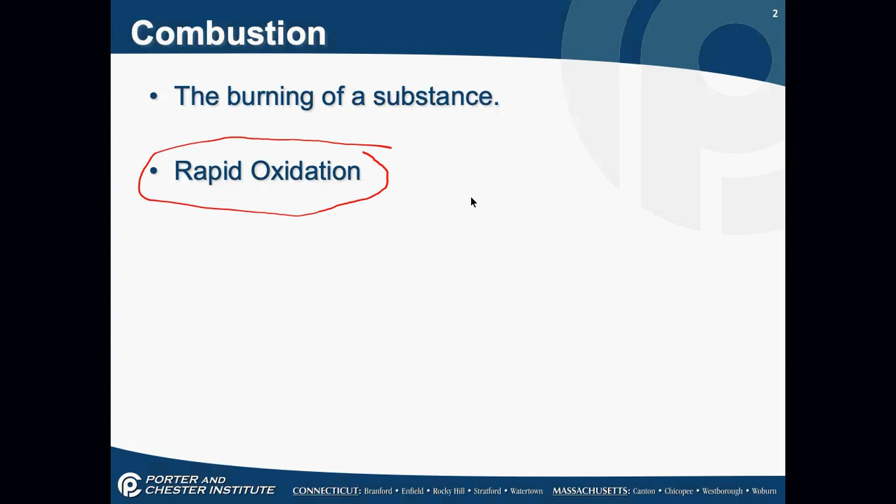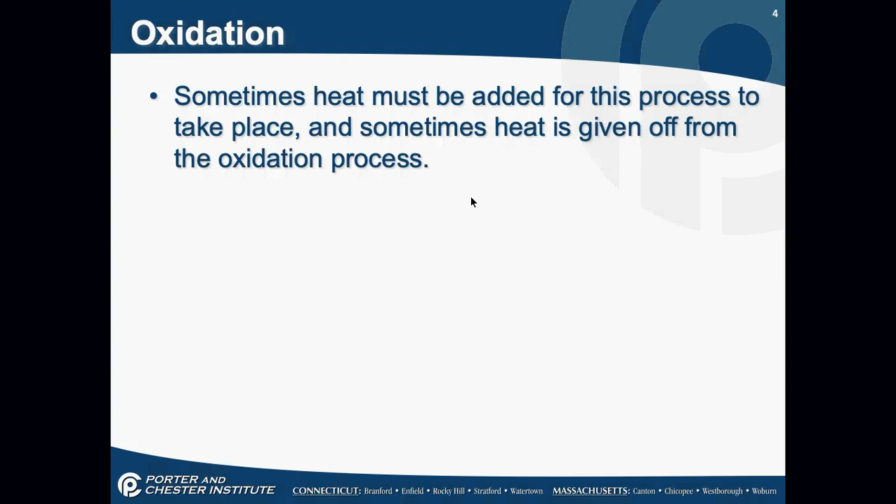What is it? It's combustion. It's the burning of a substance. We know that all matter is made up of elements. One of the most basic elements is oxygen. Many materials react with oxygen. This is why it's called oxidation. Rusting of metals is a common form. Sometimes heat has to be added for this process to take place, and sometimes heat is given off from this process.

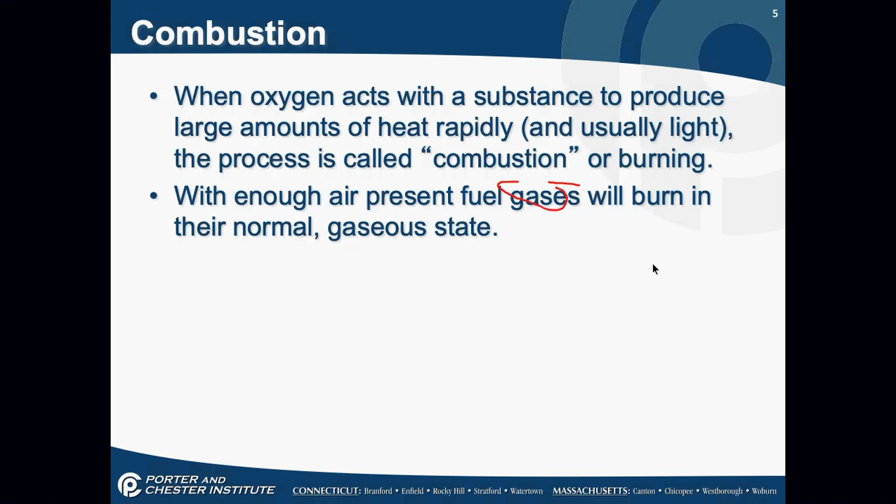When oxygen acts with a substance to produce a large amount of heat rapidly, and light as well, it's called combustion or burning. When enough air is present, fuel gases will burn in their normal gaseous state. Again, gases. We cannot burn a liquid or a solid. Solid or liquid fuels have to be changed to a gas first before they burn. I've got to add heat to make this transition. Anytime I'm making a transition from a solid to a liquid, from a liquid to a gas, I have to add heat. Remember, latent heat happens anytime there's a change of state.

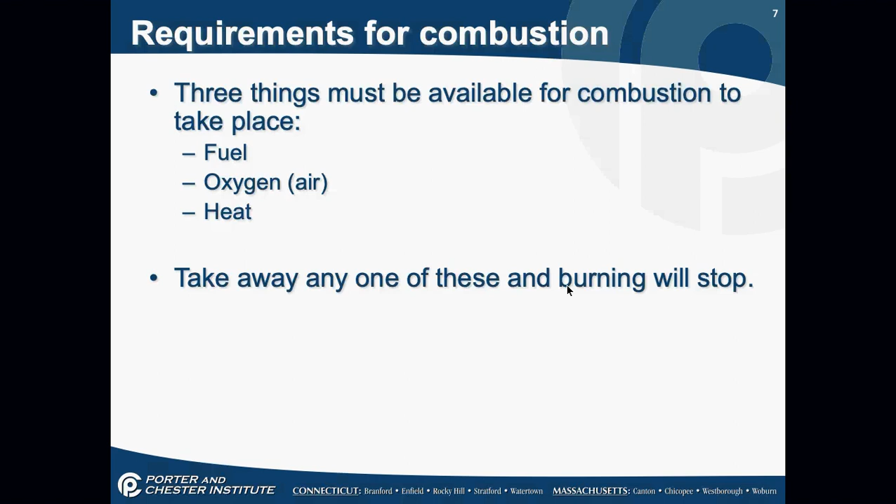Three things have to be available for this to take place: fuel, oxygen, which is part of air, and heat. You take away any one of these three items and the burning process will stop. This is called the triangle of combustion. This is really critical, folks, for you guys to know. You should be able to draw this out if you're ever asked to. We have fuel, air, and heat. You remove any one of these, the combustion process stops.

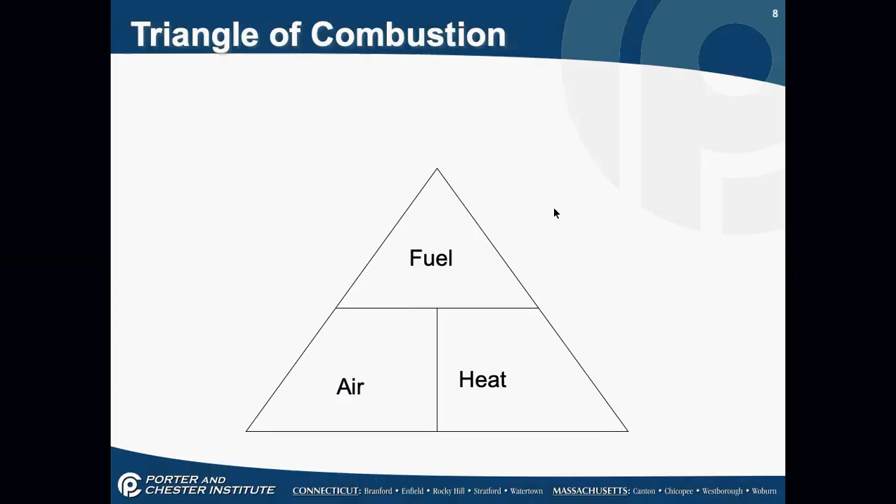Fuel oil is 85% carbon and 15% hydrogen. Air is 21% oxygen and 79% nitrogen with some other little stuff thrown in that really doesn't matter. You're in control of the combustion process because you can regulate both the fuel and the air. Whenever we're working on oil burners, those are the only two things we can regulate, the fuel and the air. That's what we're in control of.

So we take a wood-burning fire for an example. I throw a blanket over the fire and cut off the air. The fire goes out. I drag all the wood away from the fire. The fire goes out. I throw water on the fire. We chill the wood temperature down. The fire goes out. Every one of these examples has something to do with the triangle of combustion.

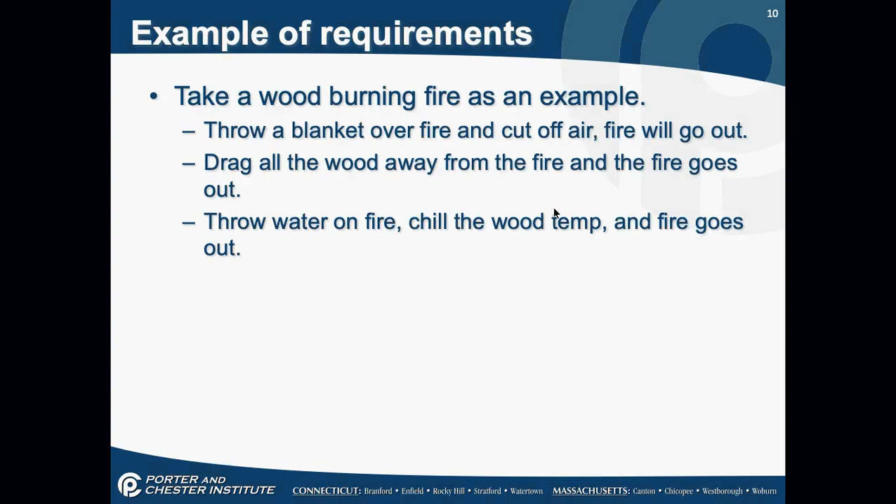Combustion gives off stuff. We call those the byproducts of combustion. Combustion gives off water vapor. It gives off carbon monoxide. It gives off carbon dioxide. And it gives off carbon. All of these are byproducts of combustion. Which is the most dangerous byproduct of combustion? Carbon monoxide. Yeah, carbon monoxide is the most dangerous byproduct of combustion.

Can carbon dioxide be dangerous as well? Yes. It's not as dangerous, but if carbon dioxide totally replaces the oxygen content in a room, it's dangerous. If you ever feel like you're falling asleep in a classroom with a bunch of people in it after like 3 hours of lecture, it might not be the lecture that's putting you to sleep. It might be the fact that everyone is exhaling carbon dioxide, and if there's not enough fresh air coming in, that room suddenly has a lot of carbon dioxide in it.

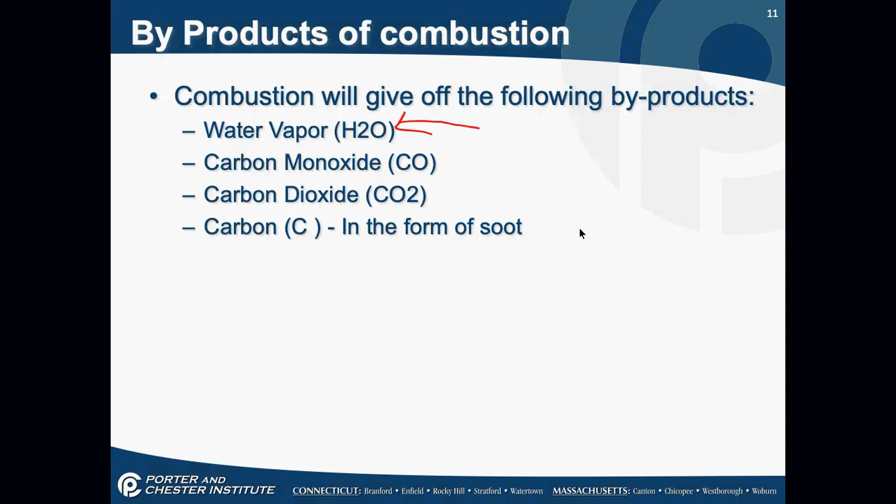So again, all of these are byproducts of combustion. You hold your hand over a candle flame, not too close so you don't get burned, and you're going to feel some moisture. Carbon monoxide, I really don't want it coming off a flame, but it's there. Carbon dioxide, it's part of burning. And then you have carbon, which is soot.

The air-fuel mixture must be exact. If the mixture is correct, then proper combustion is achieved. If the mixture is incorrect, you have poor combustion.

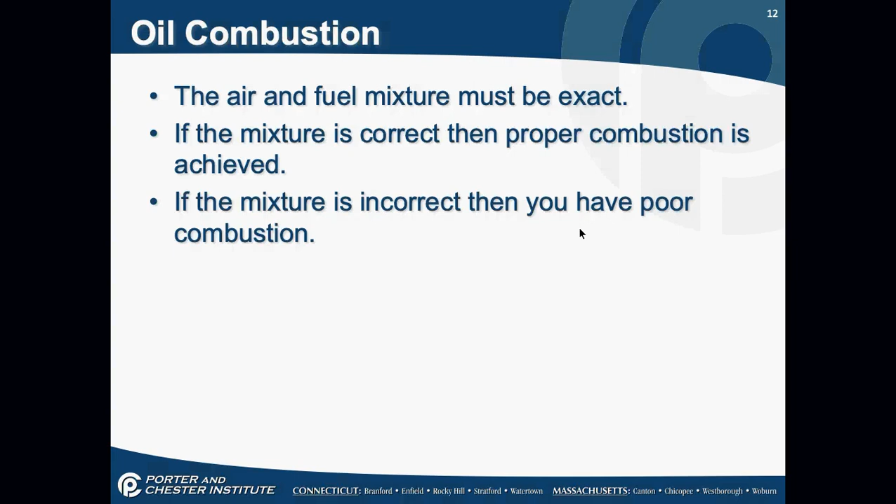As long as we have proper combustion, we get more heat per dollar. In other words, we're burning all the fuel. We have clean exhaust, we have a clean furnace or boiler, and we have proper efficiency. The fuel and air ratio, the mixture between fuel and air, is your most critical mixture. That's your only adjustments. But it can tell the difference between a lot of money being burned, a lot of carbon monoxide, soot, and everything else, or a proper and clean burner.

Less heat per dollar. You're not getting the 140,000 BTUs per gallon. You're getting more soot and smoke, which translates to more furnace or boiler maintenance. Unburned fuel equals poor efficiency and a waste of money.

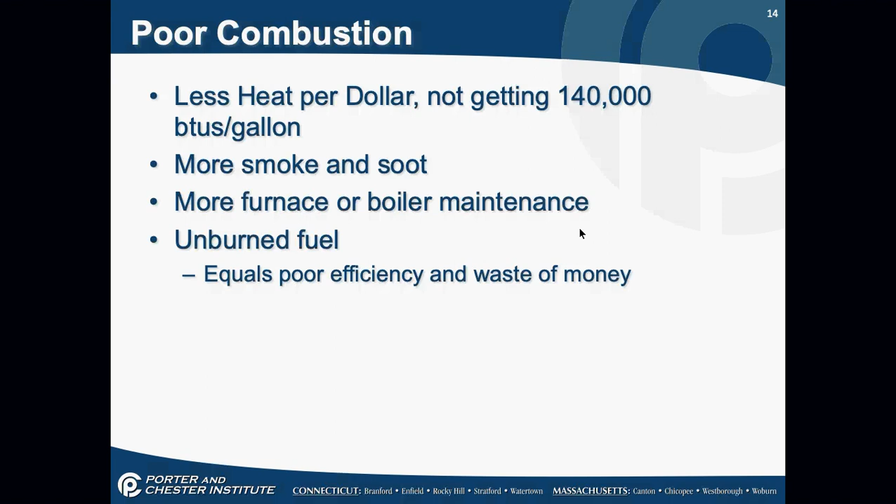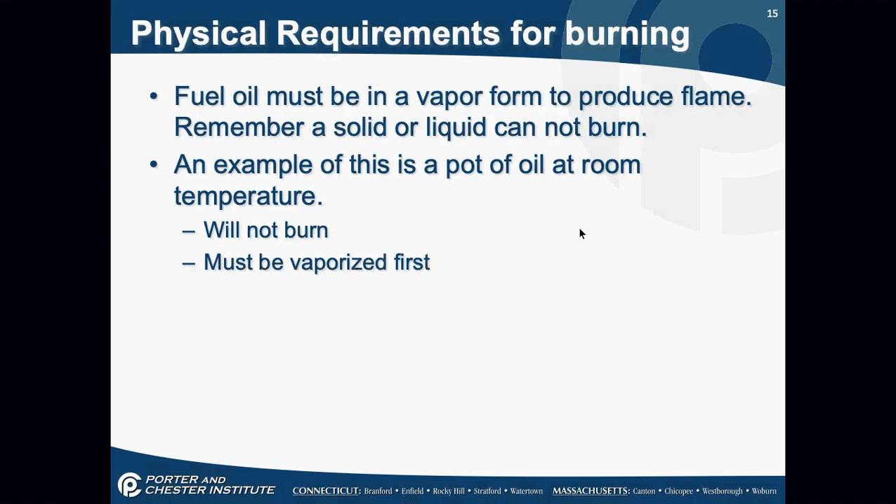Fuel oil must be in a vapor form. We've talked about this a lot. An example of this could be a pot of oil at room temperature. If you quickly dip that match into the oil, and not just light the surface where the vapors are, the oil's not going to burn. It has to be vaporized first. The oil burner has the primary function of vaporizing this fuel.

We have 4 different types of oil burners available. Some of them you'll never see. You have the pressurized atomizing or gun type. This is the one we've been talking about. You have a rotary cup, you have a vaporizing, and you have a pot burner. You're never going to see the last one.

The pot type burner basically looked like a fry pan. The oil came in with a sort of a float valve. It had a puddle of oil and it burnt the oil on the top. Basically, the fire just sat on the top and burnt off the vapors. The heat from the fire creates more vapor. These things used to be installed under the floors in front entry homes of houses.

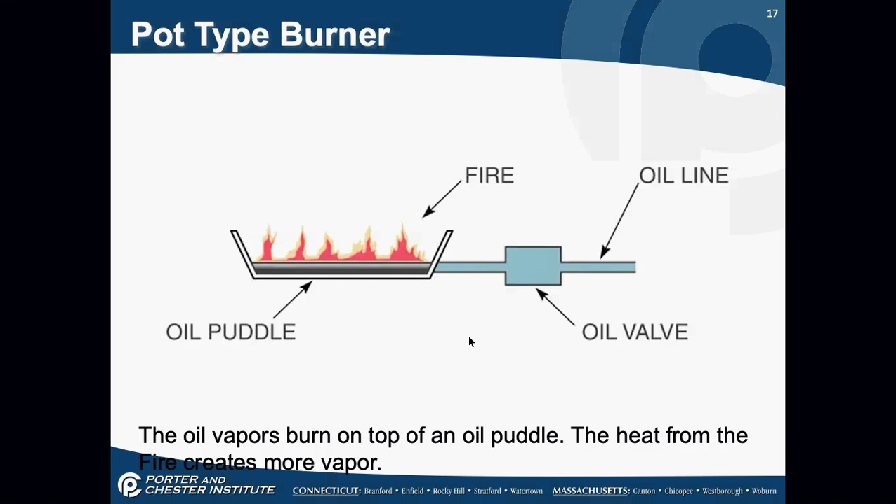Now look at this. Where's the exhaust? Anybody, where's the exhaust? There is none. Cannot tell. There is none. Think people might have died a little bit here? The carbon monoxide went into the houses. You had to have open windows and good ventilation or you had issues.

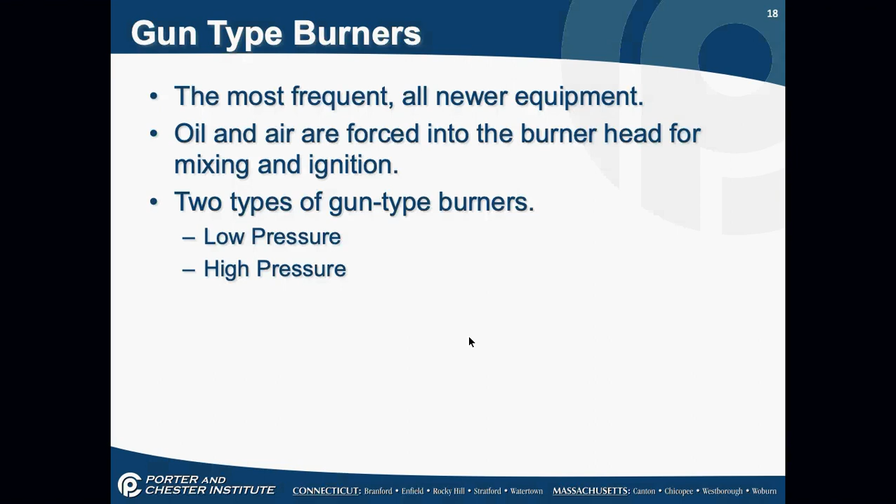Gun-type burners, they're the most frequent. They're on all newer equipment. Oil and air are forced into the burner head for mixing and ignition. There are 2 types of gun-type burners, low pressure and high pressure. These are all your parts. Hint, by now, you should be able to identify all these parts. So in other words, if I gave you a blank diagram and gave you 15 minutes to name all the parts, you should be able to do it. All of these parts we've talked about.

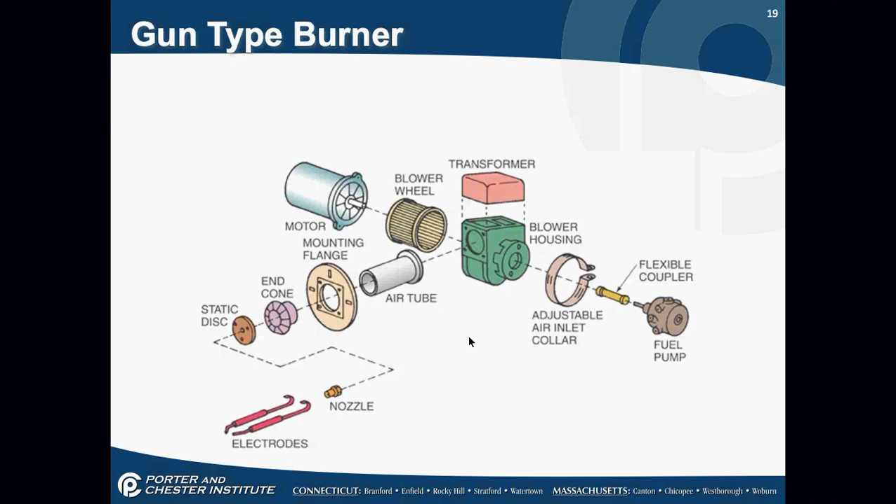A low pressure type only runs at about 10 psi of oil pressure. We mix the air and the oil together before it goes through the nozzle. That's a low pressure type burner. You don't see these. They're more in process stuff, more in like making something out of something. Air and oil is mixed together right in the burner tube before it comes out of the nozzle. Secondary air comes in around it. This type of burner is not found very often anymore.

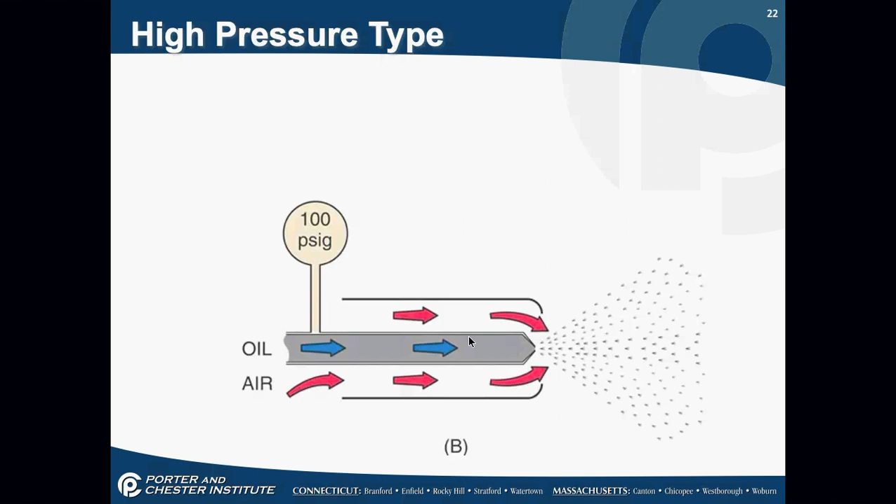The type of burners we are dealing with are the high pressure burners. The oil is forced through by itself and then mixes with the air as it comes out of the nozzle. 100 psi and higher. High pressure gun type burners. Oil pressure is much higher. It is the type of most modern burners. It's a high pressure gun type burner.

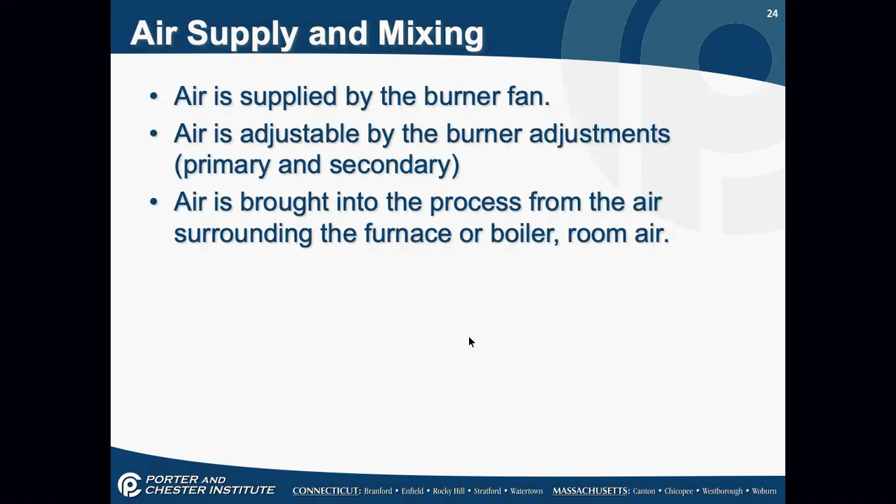Air is supplied by a burner fan. We've talked about this. Air is adjustable by the burner adjustments. Air is brought into the process from the air surrounding the furnace or the boiler room. It's room air. It's conditioned air. Fuel and air are mixed together by some of these parts: turbulators, end cones, spinners, flame retention heads. All are designed to mix the droplets of oil and air.

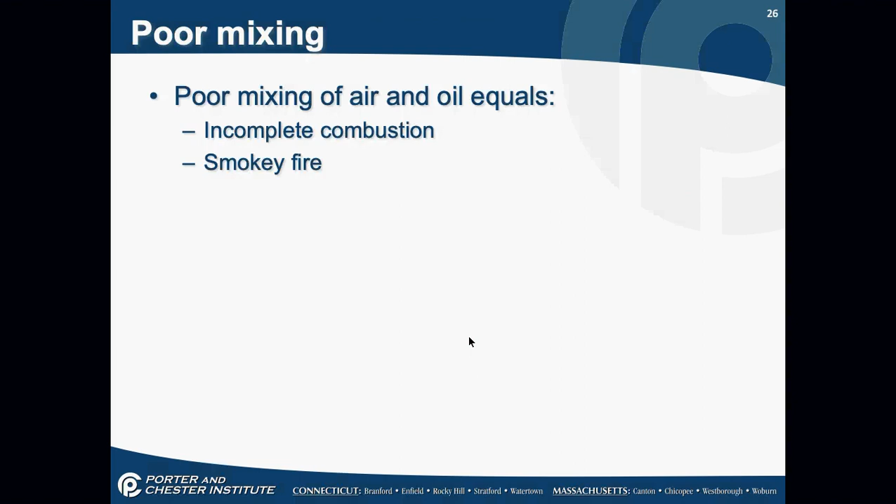Now think back to yesterday. What did I tell you about this mixing process? What about the spinning of the droplets in the air? There's something very important. They rotate in different directions. Yeah, rotate in different directions. Very important. Poor mixing of air and oil means incomplete combustion, which is smoke. You got a very smoky fire if it's not mixing properly.

We have several factors that control this air and fuel mixture. We have to have the spray pattern correct. We talked about this yesterday with our nozzles. We talked about the spray angle being correct. We talked about airflow that has to match both the angle and the pattern. And we talked about the importance of all nozzles matching the manufacturer specifications. All of this has to do with controlling the air-fuel mixture of the oil.

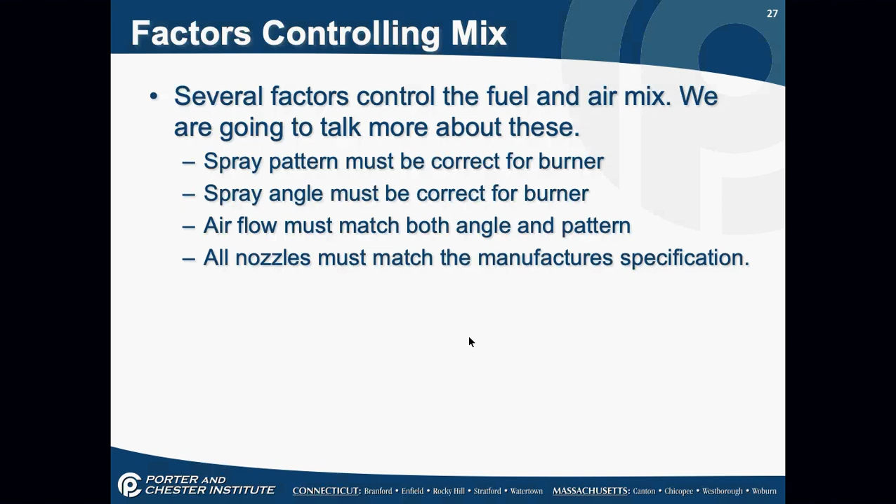It is extremely important that the oil does not hit the outside of the combustion chamber. It's extremely important that the air-fuel mixture is absolutely correct. The burner design and parts are very important to this process. Flame retention heads, if there's air that internally recirculates, if there's an end cone on the end of this, the air swirl pattern, all of this is extremely important to this air-fuel mixture.

Again, there's only two things you can control in an oil burner, and that is the amount of air and the amount of oil. Burner design varies by manufacturer. Any questions on that?

No, sir. Anybody else?

Okay. Now, I talked a little bit yesterday about, I asked a question, can I increase the efficiency of oil boilers as they get older? No, sir. Okay. Now, that's not to say that a burner cannot be kept efficient. So as we go through this part, I really want you to keep in mind that burners don't get better with age. I also want you to keep in mind that you are not mechanical engineers, but there are some very simple things that you can do to keep the efficiency. Okay, but efficiency becomes a big place.

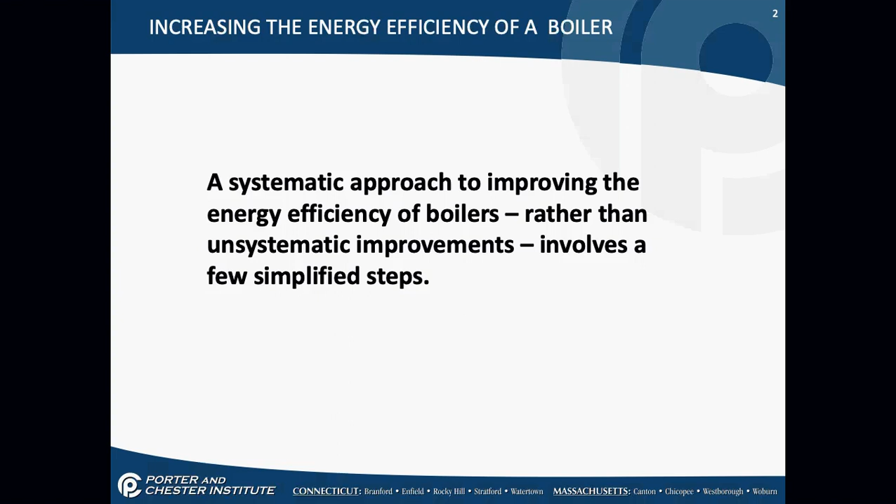Now, this is talking about boilers more than furnaces, but it still involves burners, which is why I even go over this. Okay? We have to keep things clean. Everything has to be clean. If we have a soot layer, and that's why this is starting to talk about importance, and this is why we talk about annual maintenance. A soot layer, that's a very fine soot layer. I mean, 0.03 inches is not all that great. It can decrease efficiency by 9.5%. If I have a 0.18 layer of soot, it can affect efficiency by 69%.

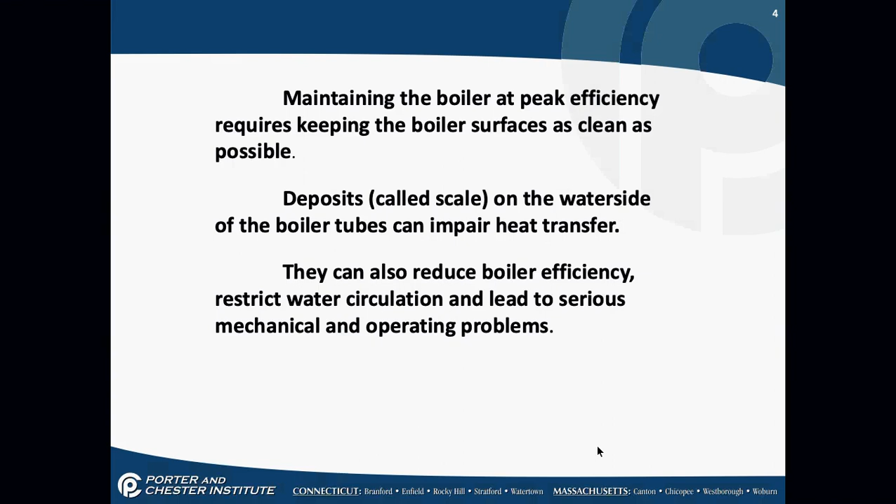Think about that. So a dirty furnace, a dirty boiler, reduces efficiency, and the reason is because the boiler or furnace is not absorbing that heat, it's sending it up the chimney. The flue gas temperature goes up, as does energy cost. So my biggest efficiency thing in both boilers and furnaces, this says boilers, but it's both, keep them clean. Maintaining the system at peak efficiency means keeping it as clean as possible. Deposits on the water side, that's the inside of the boiler, which we'll talk much more about in the future, can also impair heat transfer. But the biggest issue we have is with the soot building up, and that's on the outside of the boiler tubes. 1 millimeter of scale buildup in a boiler that's on the water side can increase fuel consumption by 2%.

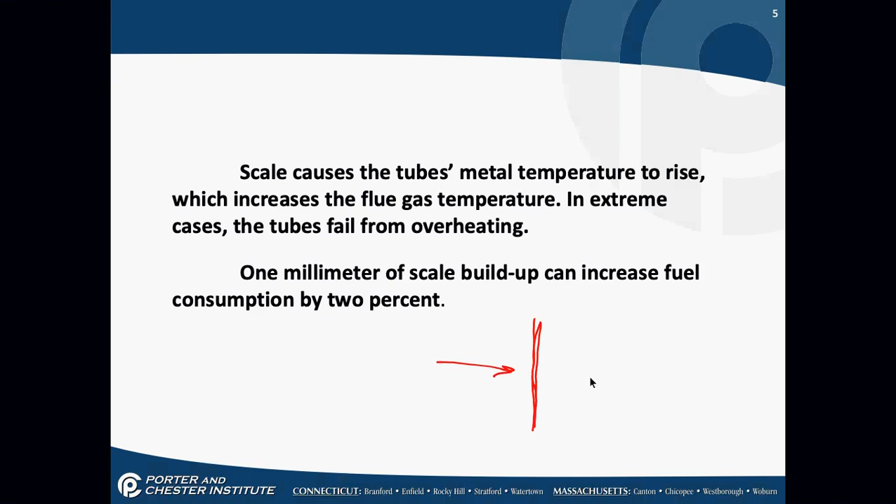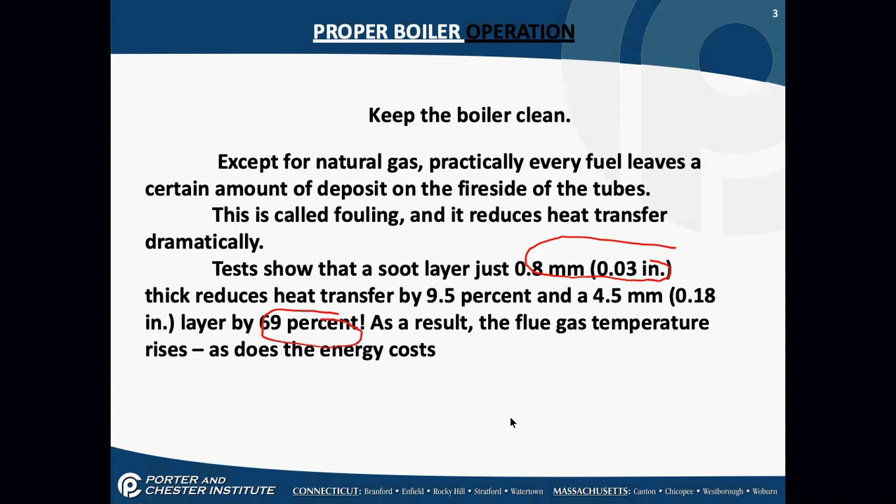So we basically have a heat exchanger. Think of this wall as a heat exchanger. My fire is on this side of the wall. My water or air in a furnace is on this side of the wall. Anything that builds up on this wall can increase fuel consumption. Soot, from my last slide, soot can affect efficiency in small quantities, 0.03 inch layers of soot, 9.5%. That's a lot of money. Double that to 0.18 inch of soot, 69% fuel cost lost up the chimney. Okay, so cleanliness makes a big difference.

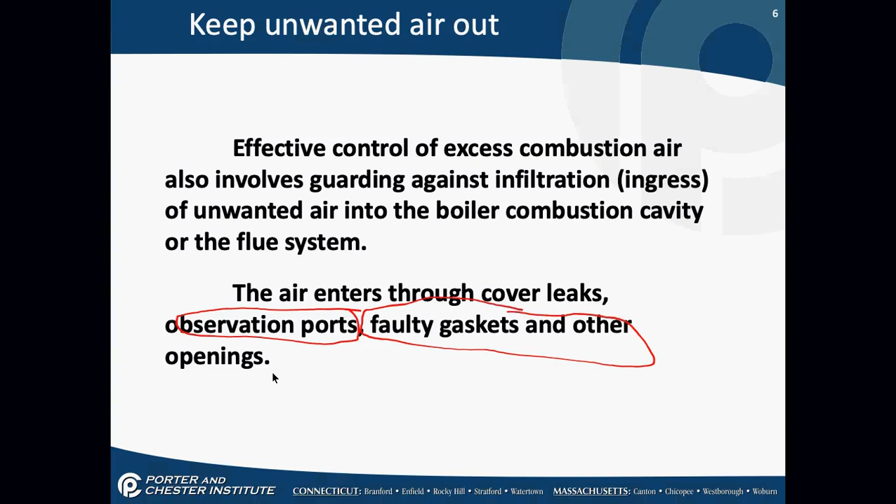Okay, excess combustion air, I'm going to talk about this. We want to remove unwanted air. We mix air in to our combustion process in exact amounts. So if we have other air leaking in through missing ports, missing covers on observation ports, faulty gaskets, doors not closed properly, things not put together properly, you're going to have excess combustion air. It's going to affect your combustion, and it's going to allow the combustion gases to go up the chimney too fast before all the heat is absorbed. So again, anytime we send combustion gases up the chimney before absorbing all the heat, we lose efficiency.

We measure excess air, and I'm going to talk about that when we talk about our combustion efficiency. Excess air is one of our measurements. It is one of the major ways our oil burning equipment drops in efficiencies. Too much air increases the flue gas temperature and drops the efficiency dramatically. Okay, too much air. Now, too little air, what does that cause? What if I have too little air in a system? I mentioned this yesterday. What does that cause? Should decrease, shouldn't it?

If I have too little air, it's going to increase the efficiency drastically, but it's going to cause another problem. What is it? What does incomplete combustion cause? Carbon monoxide. That's one. What else? Carbon dioxide. I'm more looking for a nasty substance that if it gets too bad, it's the apprentice job. Soot. That's the one. Incomplete combustion causes soot. If I have too little air, I'm going to have a very smoky fire, and I pity the next fool who's there on the piece of equipment.

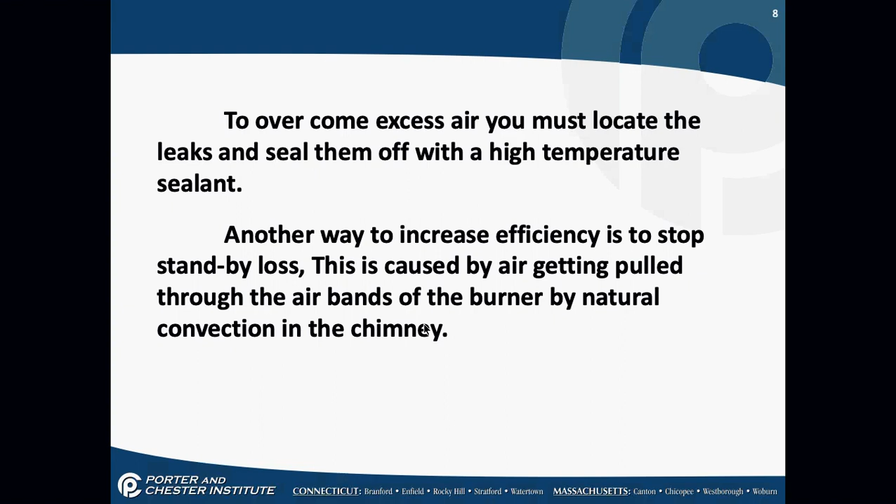The way we do this is we use a specific high temperature sealant. It's a goop that's high temperature rated, and we seal the air leaks. You should not be able to see the oil flame through any opening other than a small observation port covered with tempered glass when that furnace is running.

The use and sizing of a boiler system. We talk about load sizing. We give an entire design course on this for a very specific reason. Back in the dark ages, when these furnaces and oil boilers were first being installed, someone stood at the curb and said, oh yeah, this system needs to be 150,000 BTU output. And every house on the street would end up with the same boiler size because the contractor bought them in bulk and put them in.

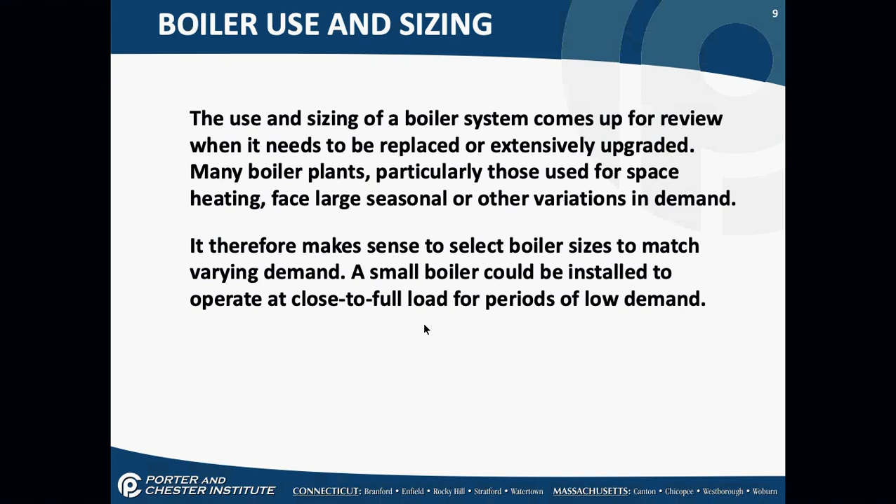So one of the things you do is make sure that the sizing of the equipment matches the building. We do a design term. I don't have you guys do all the worksheets in design term just to have you do worksheets, there's a reason for it. A good technician understands the design and the heat loss of a building.

In evaluating boiler sizes, consider current and future heating requirements. This is probably one of the biggest issues that I have seen in dealing with new customers - the sizing of equipment based on current and future heating requirements.

I don't think anybody in here on this call is, other than Mr. Smokers, from the Massachusetts direction - most of you guys are in Connecticut. Take a cold winter day, let's say January 1st, and everybody's home, sleeping off their New Year's Eve. Everybody starts getting up and using showers, someone starts cooking, using the dishwasher, running water. If you have a boiler that's also the hot water heater, what happens to the load on that piece of equipment?

Would it increase because everybody's using it at the same time? Yeah, it's going to go way up. Okay, now a year later...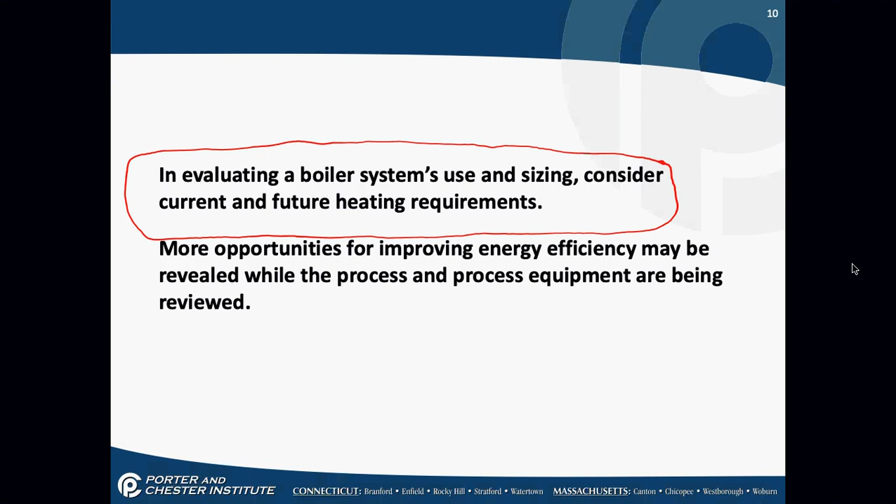All you're going to see is that the boiler is running properly. You can always ask the customer, hey, what has changed? Don't say everything's running right, I need to know what else has changed. Just ask, has anything changed in the house? The homeowner will tell you, they're proud of this stuff. What has changed in the last year? Again, you have to look at the appliances. All of this is about current and future requirements.

The best way to get the most out of oil-fired equipment is to have it serviced on an annual basis. Service consists of cleaning the flue passes with a brush or vacuum, changing the nozzle, changing the filter, changing the pump strainer. Sometimes flush out the oil line -- I don't 100% agree on that one, but they have it on there for some reason. But change the nozzle, change the filter, change the pump strainer.

So when I ask a question that says, how often do you change the oil filter, what's the correct answer? Annually, during service. That's the oil filter. A lot of you guys, I did put some comments on that assignment you turned in, okay? A lot of people were thinking air filter, which could be between 1 and 3 months. You're not going to change an oil filter between 1 and 3 months. So again, just take a look at my comments on the assignment.

Okay, that's how we keep efficiency up. Now, what is the most important thing people can do on an annual basis when they have oil? What's the whole premise of an oil system? Making sure you have enough oil in your tank. Well, making sure it's serviced annually.

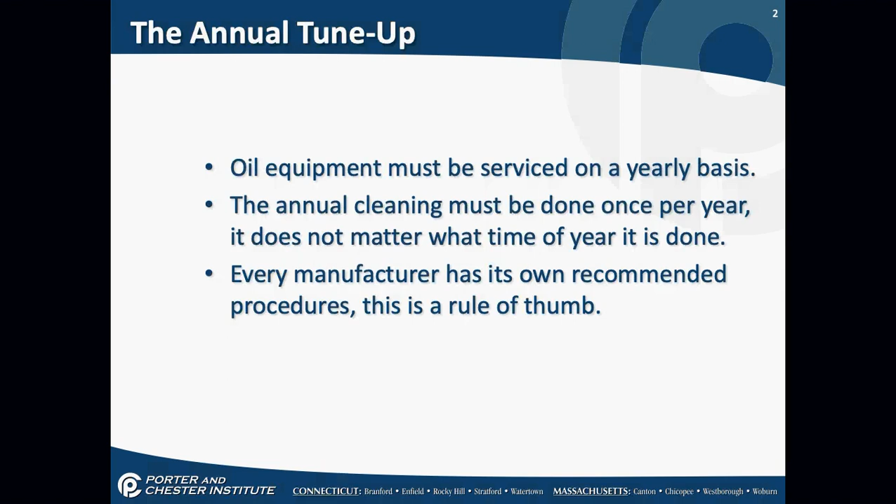Every manufacturer has its own recommended procedures. What I'm going to give you here is called a rule of thumb. For lack of manufacturer directions, this is what is involved in an annual tune-up.

We start off with the customer contact, or interview, we call it. In other words, hey, I'm here to do your annual cleaning, how's it going, anything I need to know about? Have you noticed any strange smells? Have you smelled oil, or anything else unusual coming from the basement when the system's running? Because that's what your customer will know -- any strange noises. All of this tells you if there's anything you need to look specially for. The next step of the annual cleaning is to check the system.

Why do I check this system before I start anything? Anybody? Make sure the system is functioning properly.

Well, yeah. How many times, I can't count the number of times where I was sent out to do an annual cleaning and you show up on the job site and the system is not running, and they're trying to get a service call out of the annual tune-up price. If you do not check this system before you start your annual maintenance, and if it isn't running when you're done, in other words, if there's a bad part or something, you have no choice but to replace that part courtesy of your company, because you will never be able to prove that you didn't break the system.

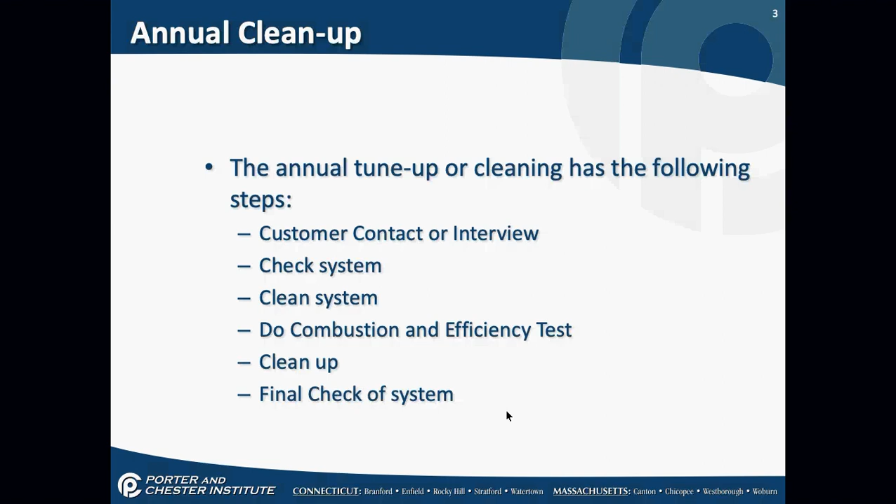Nice. That's why I spend the time on this. It's important. It may not seem important because, hey, it's not system related, it's not how to fix the box. But it's stuff I want you to keep in mind.

Depending on the company you're working for, you should be looking for opportunities such as add-ons, indoor air quality equipment, energy-saving add-ons, and the biggest one ever, maintenance plans. All of this you cannot sell to a customer if you don't have credibility. Most companies will give you some sort of spiff or bonus on this, as long as it's done honestly. I know a technician who added about $100,000 a year to their income because of energy efficiency add-ons and stuff like that. So I feel very strongly about that.

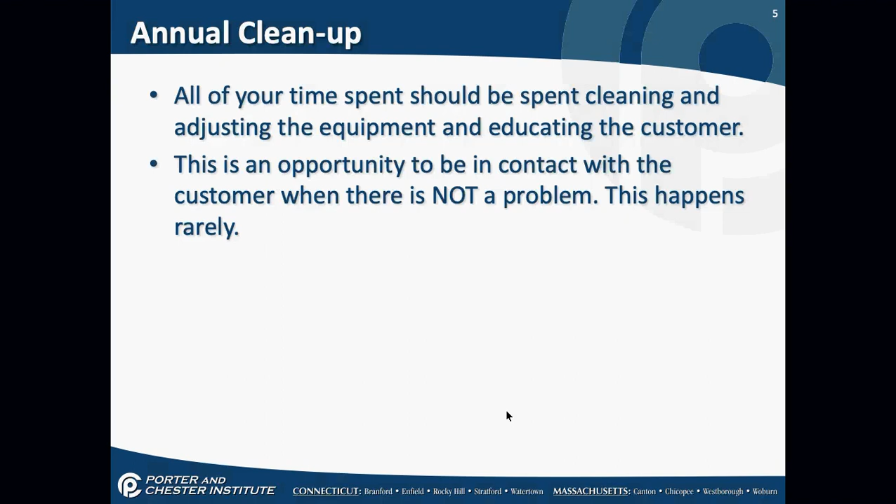Do it right, involve the customer, and you will make money. All of your time spent should be spent cleaning and adjusting the equipment and educating the customer. There is an opportunity to be in contact with the customer when there's not a problem. Preventative maintenances, annual tune-ups, are the only time you are going to be in contact with the customer when there's not a problem. In other words, you have a customer who's thankful you are there in front of them because you're taking care of their equipment and they're not going to have a no-heat situation. That happens very infrequently.

Upon arrival at the job site, spend a few minutes with the customer. Ask about unusual sounds, cold spots, fuel usage, strange smells, any concerns or anything they want you to check.

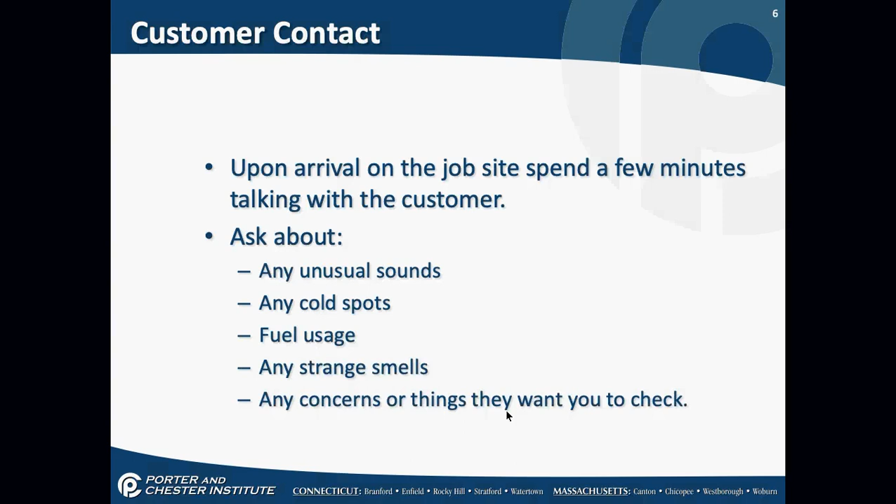Ask the customer to show you all the thermostats in the house. Don't assume there's just one. Check each thermostat. If it's a mercury thermostat, check it with a level. Since I'm there for not a service call, I'm going to recommend that the customer replace any mercury thermostat with a digital or snap-acting thermostat. I'll make the recommendation right there as I'm walking through the house. Hey, you know, this thermostat has mercury in it. We're just recommending to everybody that we replace these. If you want, before I'm done today, I'll give you a quote.

Turn all thermostats up over room temperature by 10 to 15 degrees. In other words, the system's going to keep running while I'm in the basement.

Ask the homeowner or customer to take you to the furnace or boiler. Explain to them what you're going to do and how long it will take. Ask the customer the best route to get in and out to your truck, since you're going to be carrying oil and supplies. Try to use an outside door or basement hatch. You don't want to walk across the customer's white carpet.

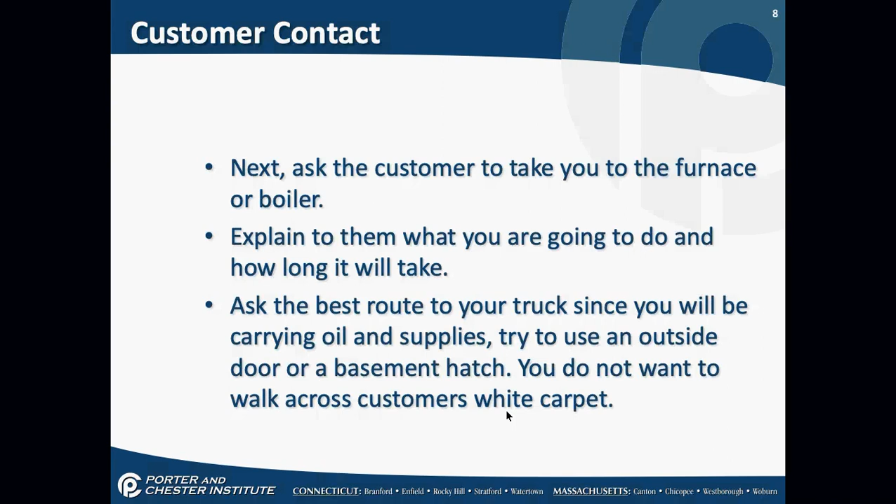If your dispatcher was a good dispatcher, they actually told the homeowner you're going to want an outside entrance before you showed up on the job site, so you won't have to break out the trusty snow shovel and shovel yourself a path. That is, if the dispatcher was a good dispatcher.

Offer to show the customer what you're doing. Most will say no, they'll see you when you're done, but offering the customer to stick around and see what's going on builds credibility. You're not hiding anything, there's no mystery. Again, don't be the guy who grunts at the customer and walks to the basement and sees them an hour and a half later.

The furnace or boiler should be running at this point due to turning up the thermostats above room temperature. Check to see if there's any signs of problems like smoke, oil leaks, or water leaks. You still have the customer with you. If that furnace or boiler is not running at this point, we have a problem situation. Again, check for oil leaks. You just want to do a quick walkthrough while that customer's with you.

You can ask the customer, hey, has this water been here for a while? Or when did this start? Hey, I smell a little and see a little oil leak here. When did this start? You're acknowledging to the customer that there's a couple problems you have spotted off the top, so there's no question ever if you caused the problem or not.

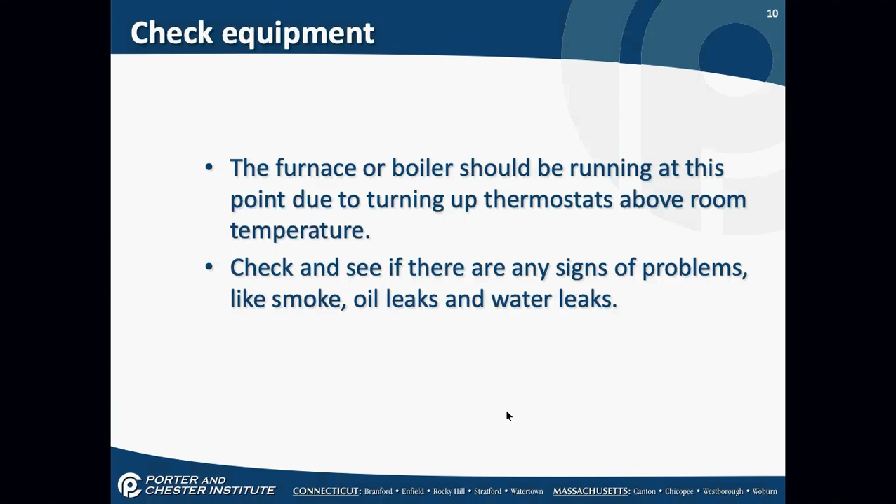Check anything that the customer may have complained about during your initial conversation. You want to note any of these problems on your service ticket. And anything that's not repairable as part of your preventative system service, you want to give the customer a price to repair. You can't replace and repair everything as part of your preventative maintenance call. Your employer is going to get pissed with you if you do that.

Some of this stuff is a service call. If I have an oil leak around a filter that I'm going to change anyways, hey, yeah, I could probably fix that oil leak when I change the filter. That's part of your service call, and you're building credibility. But if I have an oil leak in the middle of an oil line at a connection, I'll have to write a service ticket for this one because it goes outside the scope of the preventative maintenance. All of this stuff is income to your boss.

While the burner is still running, you're going to close the firematic valve next to the oil pump. You're not going to close the one at the tank. The burner is going to start to lose oil pressure and then lose flame due to lack of oil. The primary control should trip out at the time that's written or stamped on the control.

What have I just checked the operation of? Right here, what have I checked the operation of? Folks, what have I checked the operation of right here? Your stack switch? Yeah, either my CAD cell or my stack switch. I've verified that my safety works. So I've done step one of my preventative maintenance. I know that the safety works, and I also know that that valve works.

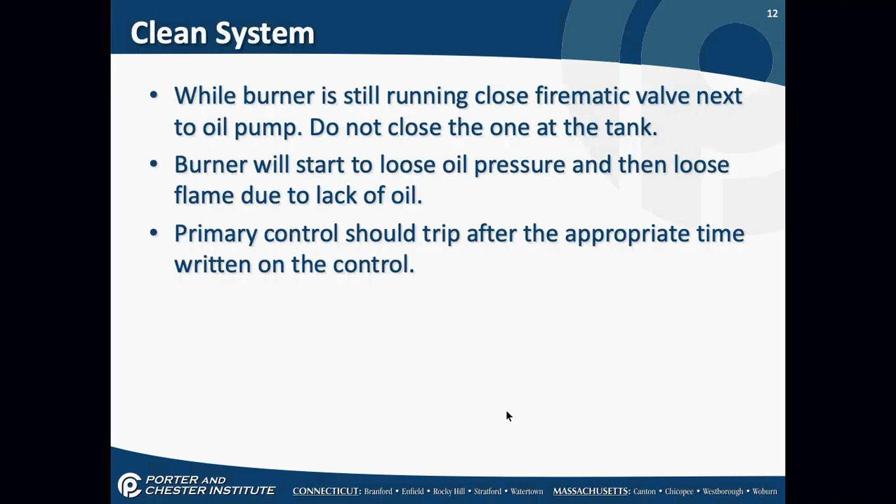Okay, what else have I accomplished? Do I have any more oil in that pump? No, I don't have a ton of oil in that burner anymore at this point. Okay, now I'm going to turn the service switch off.

Okay, if it's a forced air system, I'm turning everything off. If it's a boiler, I want to leave the water circulating in the system. In other words, I don't want to turn the main power off. I'm just going to turn the power to the burner off. Usually there's a plug you can pull. Okay, all I want to do is disable the burner. I want to leave the water circulating because I want it to cool down.

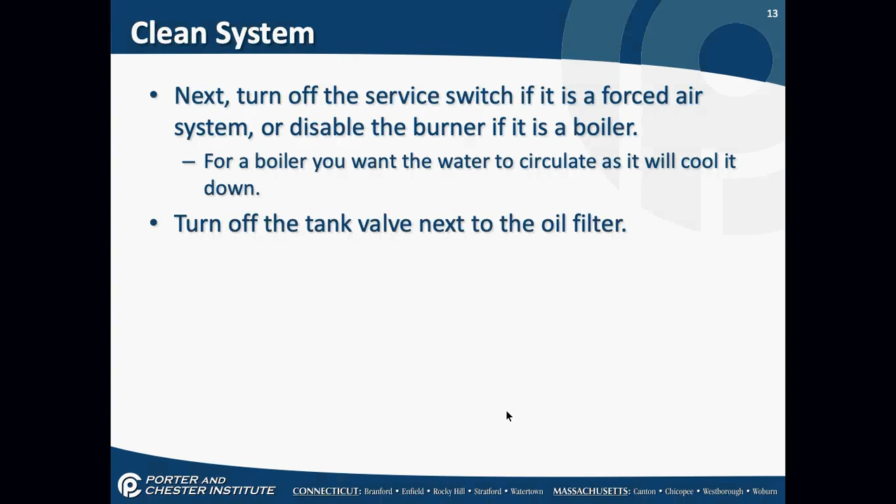Then I'm going to turn off the tank valve that's next to the oil filter. There's a valve between the tank and the filter. I'm going to close that. I'm going to put a pie pan, or for lack of anything else, a frisbee, believe it or not, under the oil filter. I also use oil-absorbent pads as well on the floor. You're going to slowly unscrew the oil filter and allow the oil in the filter to spill into the pan.

You're going to change the filter. Okay, if it's a cartridge filter, make sure you change that gasket as well. Clean all the sludge out of the filter if it's a standard filter where you're just replacing the insides. I showed you that yesterday. After putting the filter back on, check to make sure all gaskets are in. And there's only one gasket around the filter. It's very easy to forget and put a second gasket on the filter housing. Talked about that when we talked about filters.

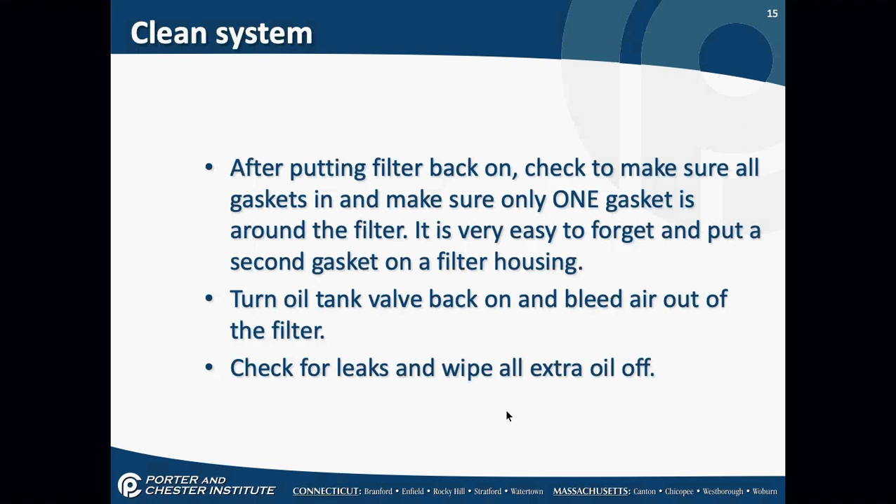Turn the oil valve back on and bleed the air out of the filter. Check for leaks and wipe any extra oil off. Did I remove any of my drop cloths or anything by this point? Or are they all still there? They should all still be there. That's correct. Oil on a concrete floor, you will never get the smell out. Okay? And some customers are very sensitive to the oil smell.

Leave a clean absorbent pad under the filter. You'll let the customer know when they can remove this later. It's okay to leave a clean pad and tell the customer, hey, leave this here for about a week. Let us know if there's any drops of oil on this. You can toss this away after a week. It can just go in the regular trash.

Okay? Because the customer knows you care about their floor. You want to know if there's a leak. I always leave one in place. Nine out of ten times the customer won't even remember that it was there, and it will be there the next time you come. Go to the burner.

Remove the nozzle assembly, being careful not to drip oil on the floor or on the burner. Take the nozzle assembly, the old oil filter, and any spilled oil out to your truck. In other words, I'm cleaning as I'm going. I'm getting any old, loose oil, any parts that could roll around, I'm getting it out to my truck. I have the nozzle assembly, the old oil filter, and the spilled oil. I've now gotten it out of the house. The reason I do this, it's very easy to step in something you didn't mean to step in.

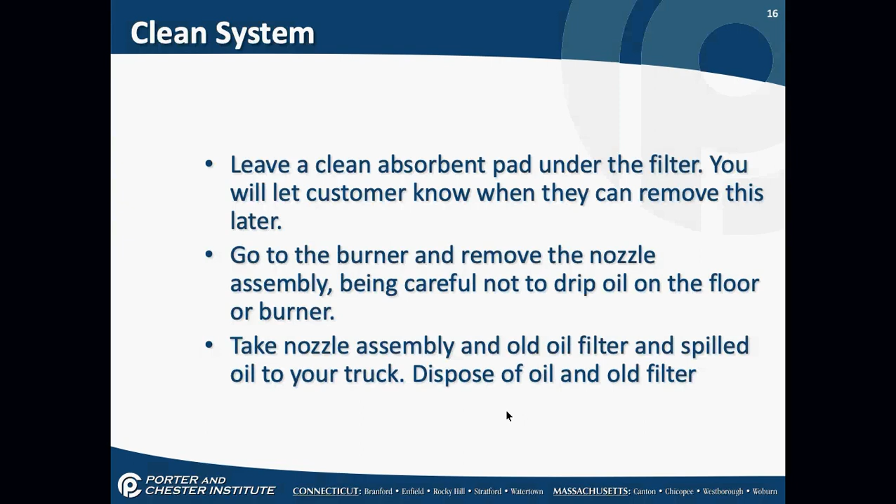Remove the nozzle from the assembly. Do this at your truck. If there's going to be a bunch of cursing and swearing going on, you don't want to do it in the customer's house. Check the filter on the nozzle for any signs of metal shavings from the pump. Remove the electrodes and clean all signs of carbon off of them. Check the tips of the electrodes. If they're worn, they get replaced as a part of the annual maintenance.

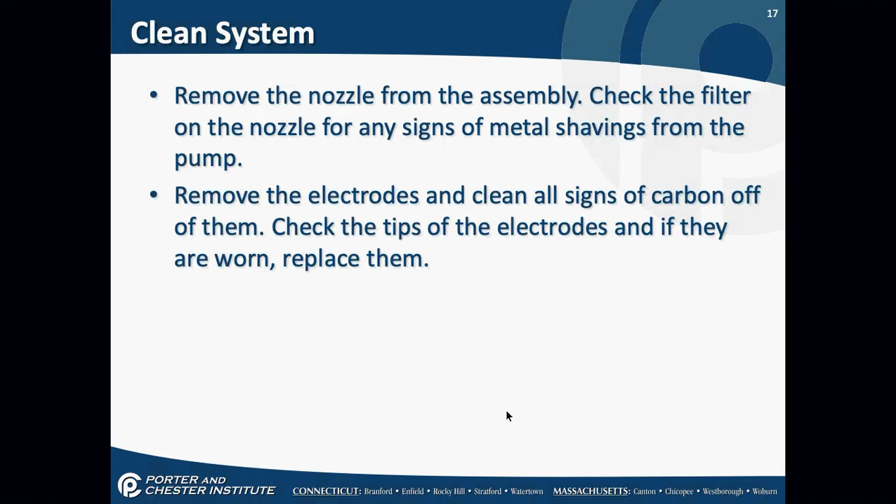Okay, save your parts. Don't toss any parts around. You want to show the customer the old and the new. It's very easy. You show them the old ones, you show them the new ones installed, and say, hey, listen, this is part of your preventative maintenance, but I just want to let you know we did end up having to change the electrodes this time. Again, important. They need to see you did the work, especially if you can show them something good that they're paying for as a part of their maintenance.

Reassemble the nozzle assembly. Replace the nozzle with a new one of the same size, spray pattern, and angle. And again, check the furnace tag to make sure the guy before you didn't use the wrong one. Replace the electrodes and adjust them using the electrode adjustment gauge. When you get into shop, you're going to practice with this and you're going to wish you had a third and fourth hand. Do a final wipe down of the nozzle assembly. When you go back in the basement with the nozzle assembly, you're taking your soot vac back into the basement with you. Now, what are you going to use to clean the nozzle assembly?

A clean, soft rag? Yeah. Okay, you're not going to use sandpaper. You're not going to use anything with a rough surface. There's a chemical that you can use that's actually a great chemical. You can find it in any place in the world. Okay, any home improvement store has it.

It's called lacquer thinner. Okay, lacquer thinner will take the soot and the carbon buildup off of anything. It's great to have on your truck because it actually works very, very well and it will not hurt the surfaces. Lacquer thinner.

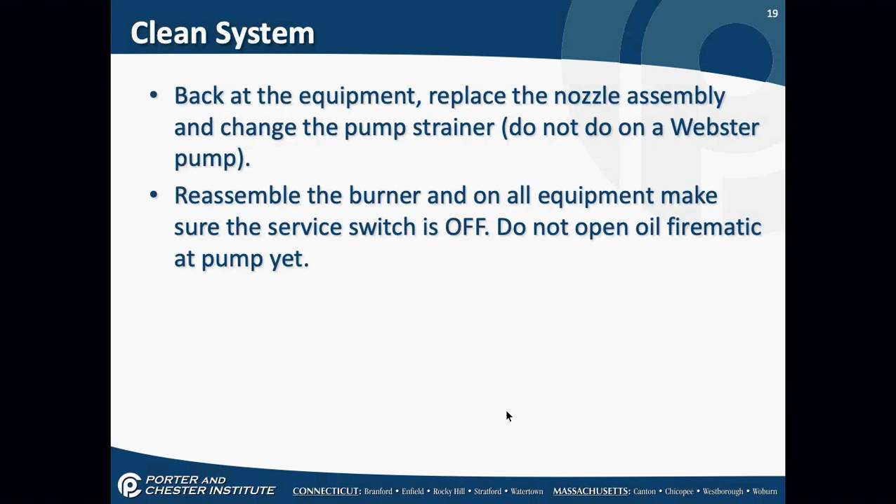Bad things happen. Okay, reassemble the burner, and on all equipment, make sure the service switch is off. Do not open the firematic to the pump yet. So you're reassembling everything, but you're not turning it on yet.

Remove the flue pipe. You're going to remove the flue pipe from both the chimney and the piece of equipment or the power venter connector. You're going to gently tap the flue pipe on a drop cloth. What that does, it takes any residue out. You're going to vacuum that up using the soot vacuum and put it aside in an area where it won't get damaged. When you're tapping that flue pipe onto the drop cloth, you're doing something else that's extremely important.

What are you doing? Somebody knows the answer to this. What am I checking when I'm tapping that flue pipe? Well, you got your residue. What am I checking when I tap that flue pipe on the ground? Make sure it's getting hot. Well, no, because it's really turned off, but I'm making sure.

When you have metal that comes in contact with moisture, what happens to the metal? Rust? It rusts. One of my byproducts of combustion is what? Come on. Vaporization? One of my byproducts of combustion is water, right? Right. Okay, so I'm putting out water vapor into a metal flue pipe.

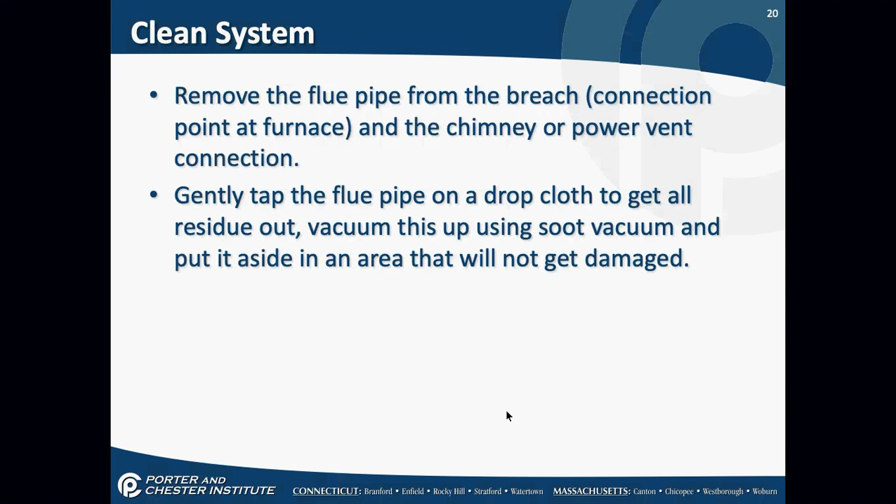Open up the heat exchanger or the top of the boiler. You're going to use brushes to completely clean the inside of the boiler or heat exchanger, depending on what piece of equipment you're on, and you're going to vacuum it out. You're going to open the combustion chamber. You're going to carefully vacuum out any residue. You don't want to damage the inside of the combustion chamber. Don't be an apprentice named Joe I had about 20 years ago.

I left Joe on a job site, because I figured by that point he would be able to manage cleaning a boiler. Simple job. Figured he'd be able to, since he watched me do it for about 6 months, clean a boiler. I left him with the tools, left him with the soot vac, left him with the brushes.

He was so proud of himself when he cleaned the inside of the boiler, and he told me he got all the white buildup out of the boiler. White buildup. I sort of was like, okay, that boiler was cleaned like 6 months ago. It was for a restaurant, and there shouldn't have been any buildup in that boiler.

So I said, show me the inside of the soot vac. It had white fiberglass all over the inside of the soot vac, sort of a white material. He had actually vacuumed and cleaned the combustion chamber right out of the boiler. Okay, don't damage the combustion chamber.

Okay, reassemble the furnace and put the flue pipe back on. Check and make sure that all screws are replaced. How many screws should be in every connection of a flue pipe? 4. Wild guess. Well, I like 4 better, but the reality is, if you have a connection of a flue pipe, you have to have a screw there, you have to have a screw there, and you should have a screw someplace over here. Okay, I was close.

That makes sure the flue pipe cannot bend. If I just put 2 screws in a flue pipe, there and there, it can wiggle up and down. If I just am lazy and put 1 screw in a flue pipe, it's going to fall apart. Okay, all 3 screws at a minimum, and by the way, that's code. On a forced air system, change the filters and check the blower assembly.

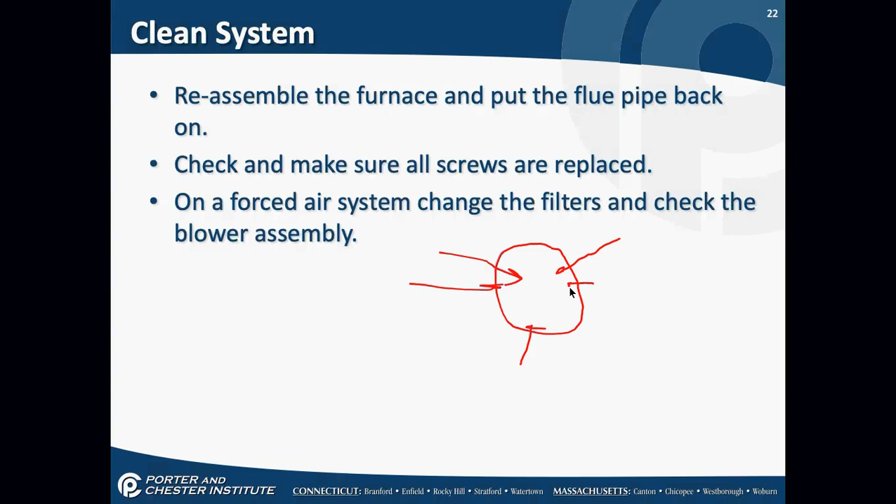Take your soot vac, old parts, and all the trash out to the truck. At this point, you are now done with the cleaning. All oily and sooty parts are away from the equipment and back out in your truck. You have no chance of making an unintentional mess or leaving something behind that's going to piss the homeowner off.

Okay? Connect a vacuum gauge between the oil supply line and the pump. Remember, you didn't open any valves yet. So you're going to open the Firematic next to the burner and leave the one closed at the tank. You're going to turn the burner on and watch the vacuum gauge. The pump should be able to pull a 10-inch vacuum.

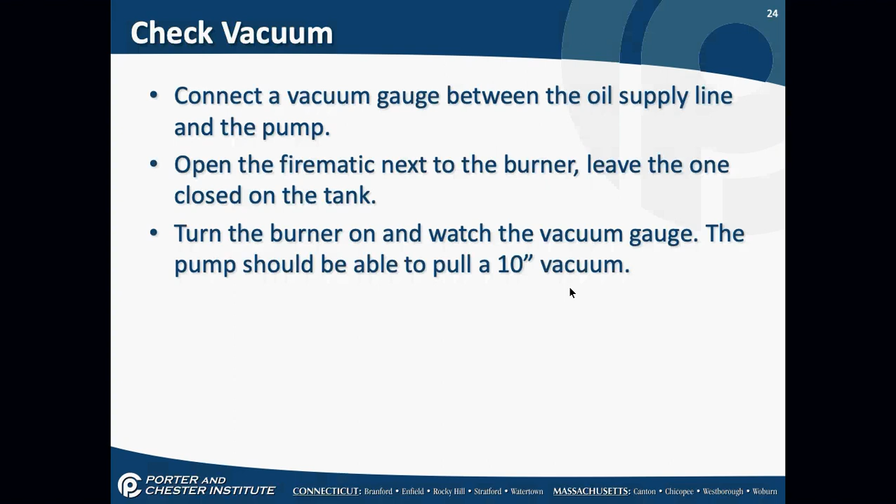What have I just checked? What have I just checked by doing this extra vacuum step? For leaks. I checked for leaks. Do I know that my oil supply line between the tank valve, including the filter, and the burner don't have any leaks at this point? Yeah. It was able to pull a vacuum.

Turn the burner off, the vacuum should hold. If you cannot pull a vacuum or the vacuum does not hold, there's an oil leak. Don't be an idiot. Find the leak. Don't leave a house ever if there's an oil leak. Turn the Firematic off next to the burner and remove the vacuum gauge. Double check all lines and fittings. Check to make sure the smoke pipe is connected and then proceed with system startup.

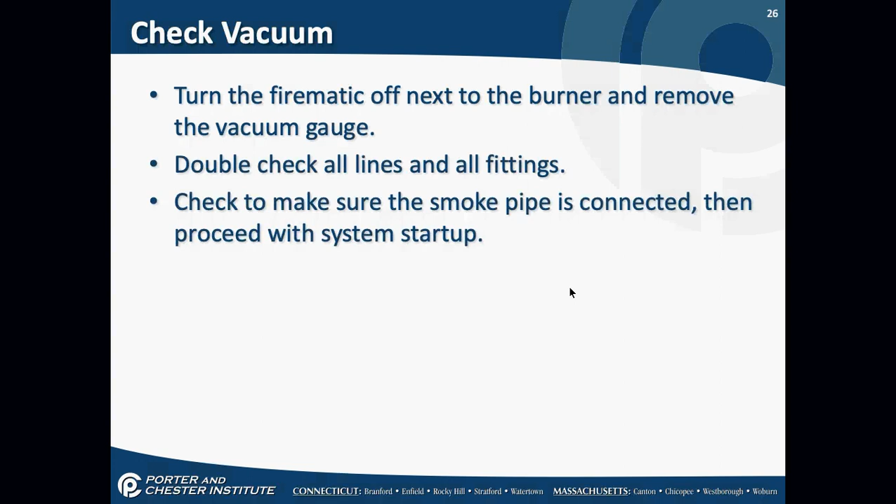To start the system up is a really great procedure. Turn the Firematic next to the oil pump back on and check to make sure you've opened the valve to the oil tank. Attach a hose to the pump bleed valve. Have a jumper ready for the primary control. Turn the service switch back on. Once the burner starts, jump the FF terminals to leave the burner running.

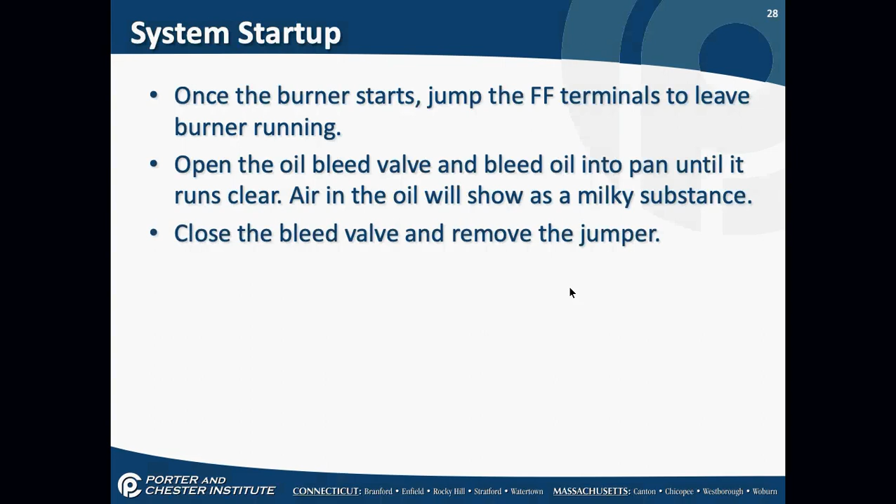Open the oil bleed valve and bleed oil into the pan until it runs clear. Air in the oil will show as a milky substance. Close the bleed valve and remove the jumper. Burner should now be running normally. You want to go back and again check for any oil leaks all the way along the fuel path from the tank to the nozzle assembly. Okay? You need to fix any leaks found.

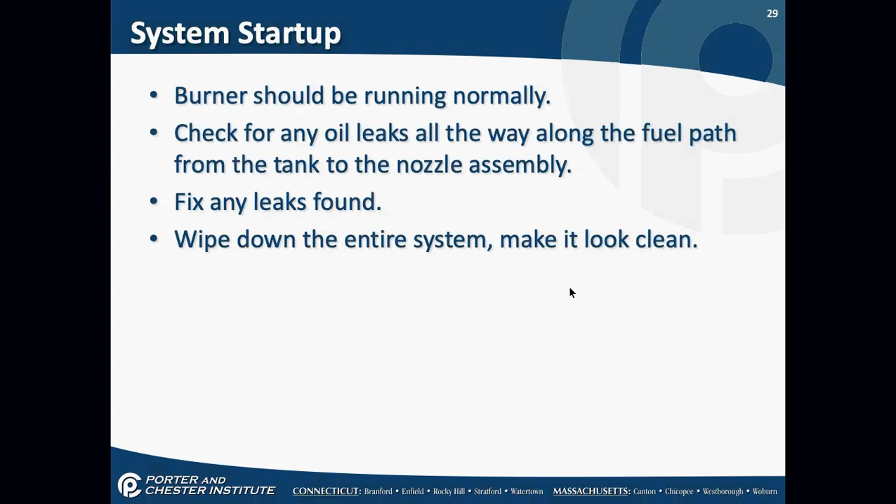Wipe down the entire system, make it look clean. You can have done a wonderful job on the inside of the burner, but that's not what the customer sees. Even if you didn't make the mess, clean it. Takes 5 minutes. Shut the service switch off, remove any remaining tools and parts, and get your combustion efficiency kit.

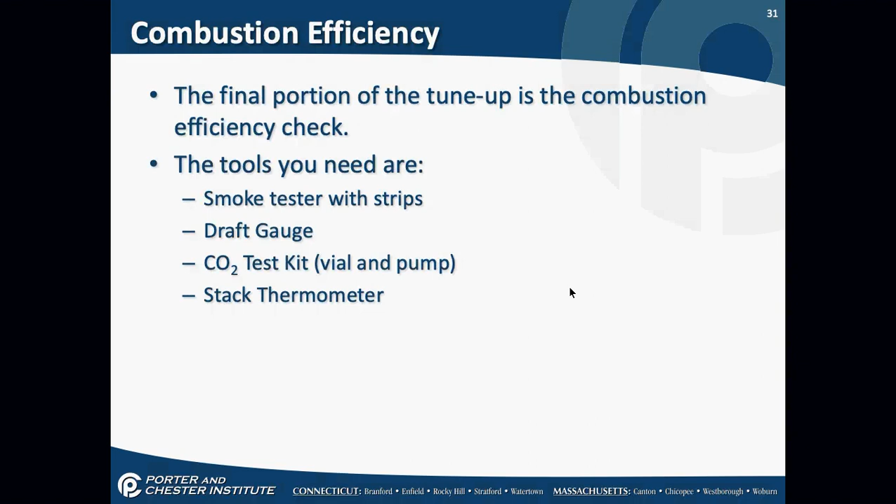The final portion of the tune-up is the combustion efficiency test. You need several tools to do this. You need a smoke tester with little paper strips. You need a draft gauge. You need a carbon dioxide test kit. You need a stack thermometer. Sometimes these two components now are part of one digital set.

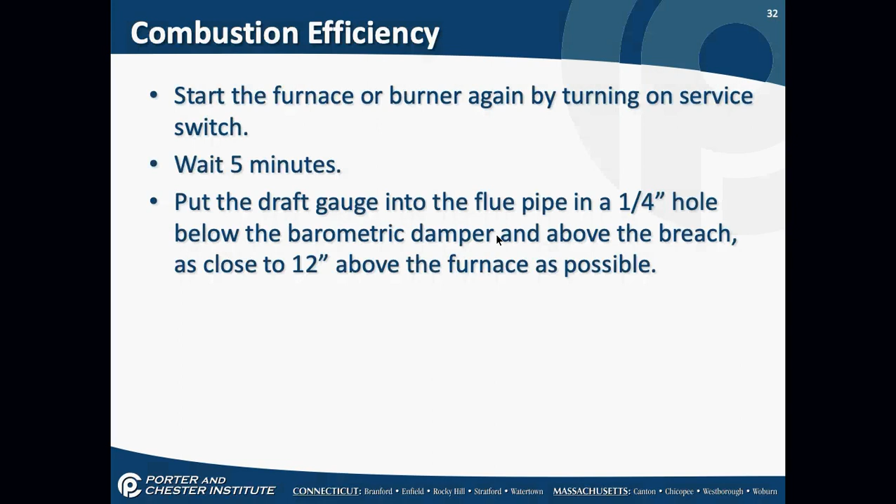Okay? Start the furnace or burner again by turning on the service switch. Wait 5 minutes. You want to check our draft. There's a 1/4-inch hole in the flue pipe. You have a draft gauge. Okay, it's below the barometric damper, and it's above the breech. That's the connection to the furnace. You want to be as close to 12 inches above the furnace as possible.

The draft gauge, when on a level surface, should have a draft reading between negative 0.04 and negative 0.03 inches water column. In other words, the chimney should be pulling. Okay? It should be pulling the smoke out of the furnace or boiler. If it's not in this range, adjust the barometric damper so it gets in this range. There's an adjustment on that damper.

Remove the draft tube from the hole in the flue and check the draft over the fire. Again, your instructor in shop is going to show you this.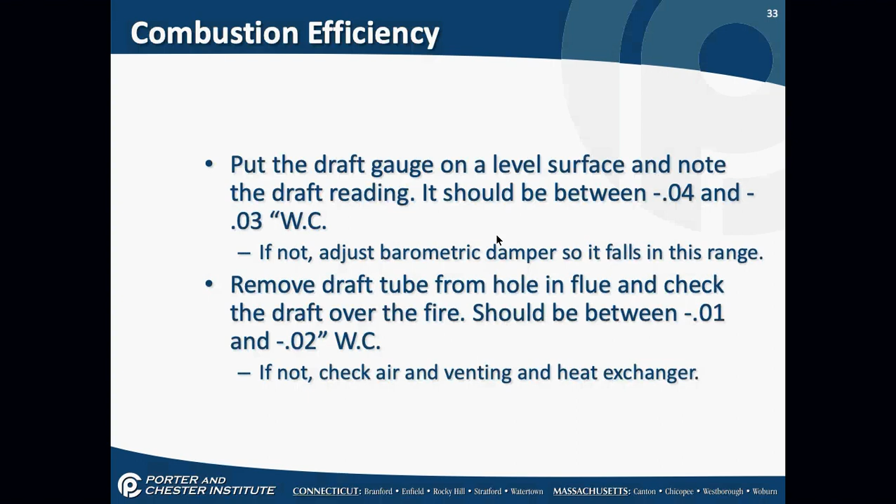The over the fire draft should be between negative 0.01 and negative 0.02. There's some high efficiency equipment out there that might have special instructions, so always look at the manual. If not, we're going to check the air, the venting, and the heat exchanger. If you have 0 over fire draft, you missed a clogged heat exchanger. Go back and clean it again.

Remove the draft gauge. You're going to use the smoke tester with a clean piece of test paper. It's a little piece of paper that you put in, almost like a paper towel. What it does is pull the air from the flue pipe through the clean piece of white paper.

You're going to pump the smoke tester 10 complete times slowly, then check the paper for smoke. You have a chart that comes with this thing that shows you the different colors to identify the level of smoke.

0 is the best smoke. You want to use the primary air adjustment on the burner to adjust it to a 0 or just a trace of smoke. The less smoke, the cleaner the burner is running. Anything over a smoke level of 1 is not acceptable. Don't go any further with your testing until the smoke is cleared up.

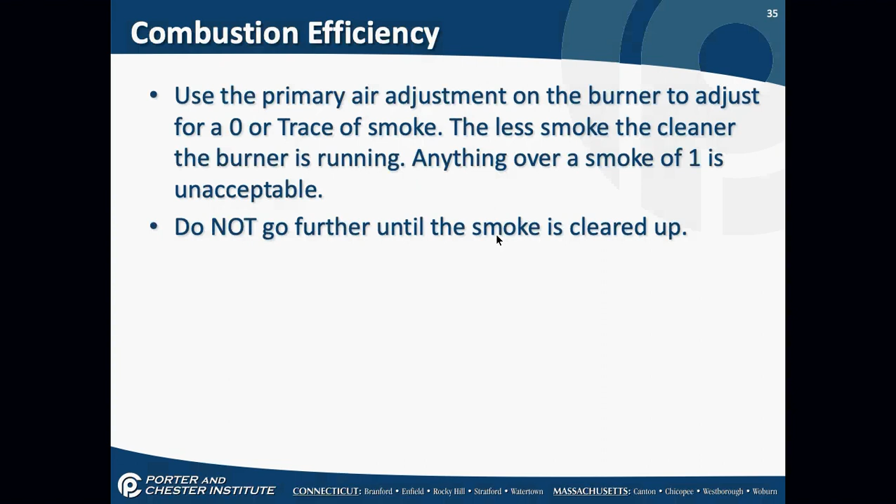There's a number of reasons for this. First, nothing you adjust further in your testing is going to work properly because your smoke isn't cleared up. Second, your digital combustion tools, if you have anything over 1 of smoke, just that little trace, it's going to break your combustion tools. They cost like $2,000 a piece. You don't want to go there. So clean up that smoke before you go any further.

You're going to use your CO2 or carbon dioxide tester. Put the tube into the hole in the flue pipe. Pump it a few times to prime the tube. This is for the older style testers, it has a fluid level in it. Make sure the CO2 tester is calibrated for 0.

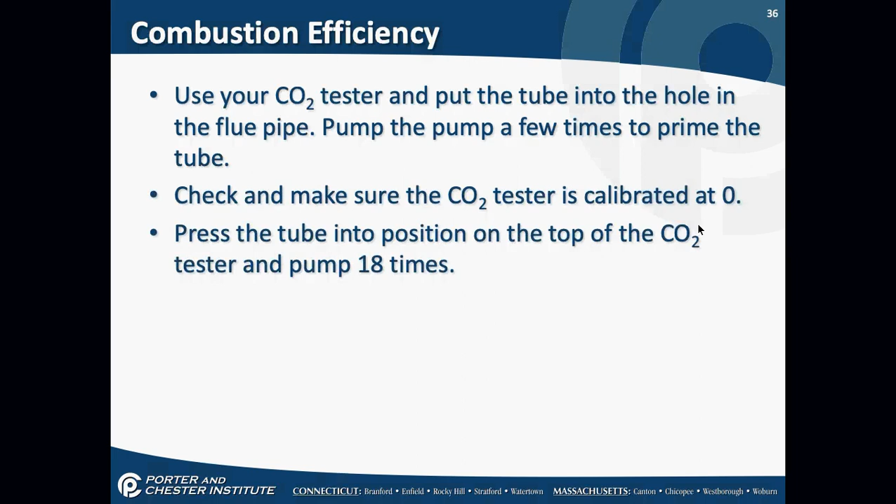You're going to push the tube into position on the top of the tester and pump it 18 times. By the way, guys, the State of Connecticut exam is still asking for this. How many times do you pump the CO2 tester? It's 18 times, it's still on the licensing exams. How many times do you pump the smoke tester? 10 times. Those two numbers appear on every license exam I've ever seen. They still have not accepted that most of us are using digital tools.

Remove the test tube from the top of the flue pipe and release it from the top of the tester. You actually flip the tester over and observe where the liquid level's at. That's the number you write down - that's the percentage of carbon dioxide in the flue.

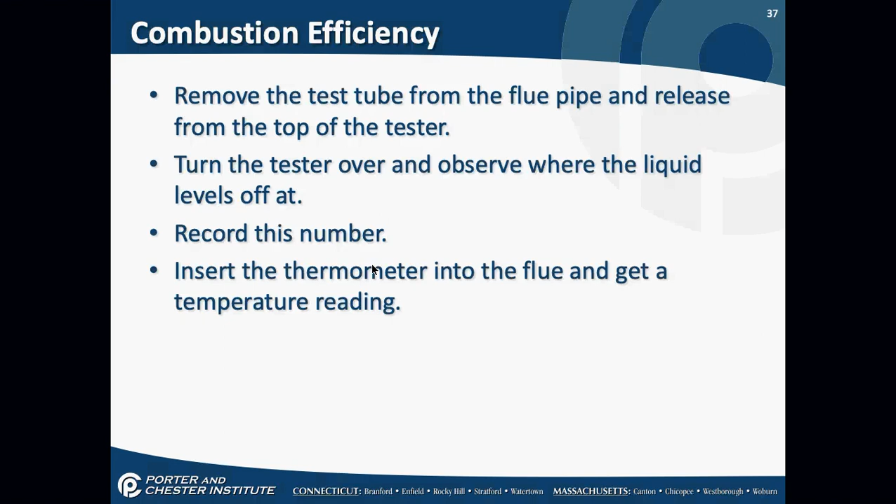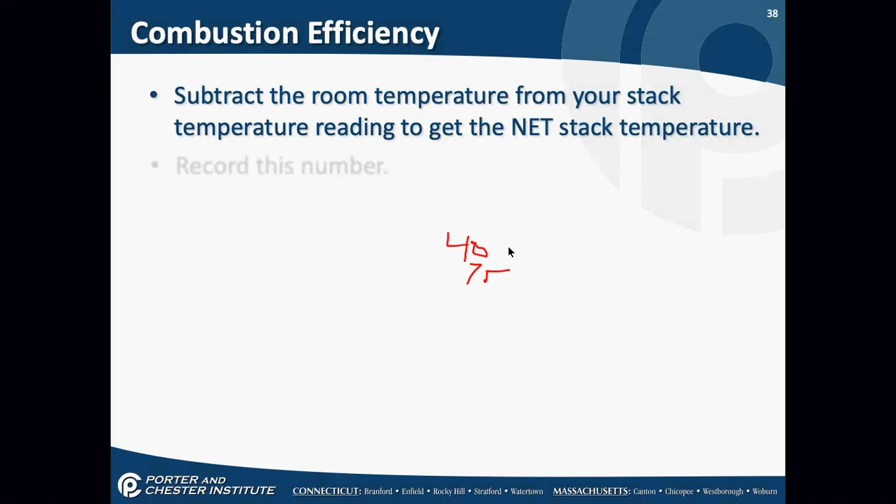The next thing you're going to do before anything else is put a thermometer into the flue and get a temperature reading. Subtract the room temperature from that reading to get your net stack temperature. In other words, if my basement is 75 degrees and my stack temperature is 400, my net stack temperature, the number I'm going to work with, is 325.

Gotta know what the net stack temperature is. So now I have two numbers - I have my carbon dioxide and I have my net stack temperature. Use the temperature reading and the carbon dioxide reading, and that will give you your equipment efficiency.

A couple rules of thumb: the flue temperature has to be over 250 degrees and under 550. Carbon dioxide should be about 12%. If it's over that, open the air shutter to increase the combustion air. If it's below that, close the air shutter to cut off some air. Carbon dioxide should be about 12%.

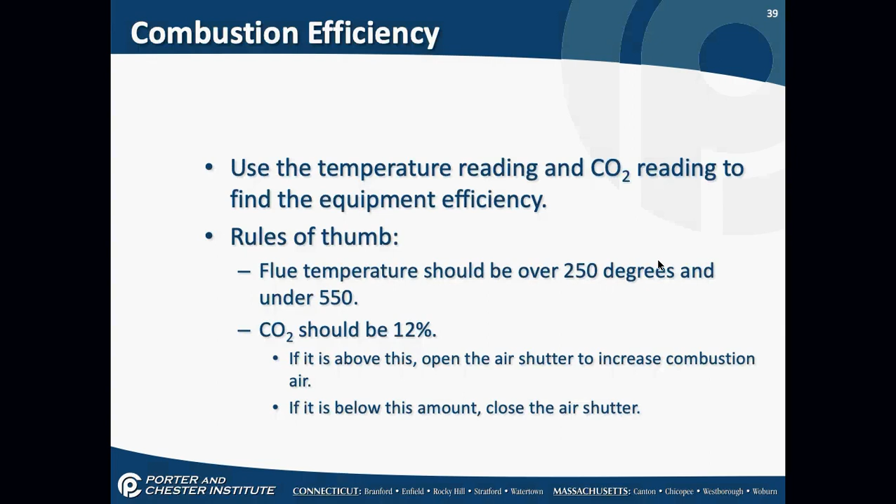Once you do these air adjustments, you have to retest. Combustion efficiency can be compared to prior service records - we hang these tags on the furnaces. But it is what it is.

Don't attempt to increase efficiency by altering nozzle sizes or other adjustments. If you have no smoke, proper draft, and proper carbon dioxide, the efficiency percentage is true. The numbers will change with weather conditions and age - they're not the same every year.

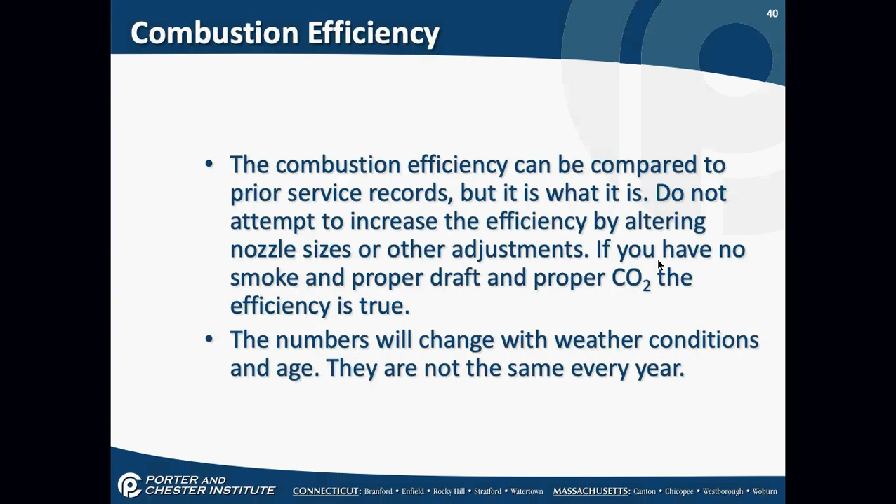If I walk into someone's basement and I see 92% efficiency on an oil furnace year after year after year, there's a problem. Because A, an oil furnace piped into a vent pipe into a chimney, not using PVC vent pipes, cannot be 90%. And B, they will not be the same every year. Someone's just filling out pieces of paper.

Once you're done, you put a 1/4-inch bolt back into the flue pipe to seal it for future use. You record all your numbers on the furnace tag and your service ticket, and you wipe down the equipment. Check and make sure you have all your tools.

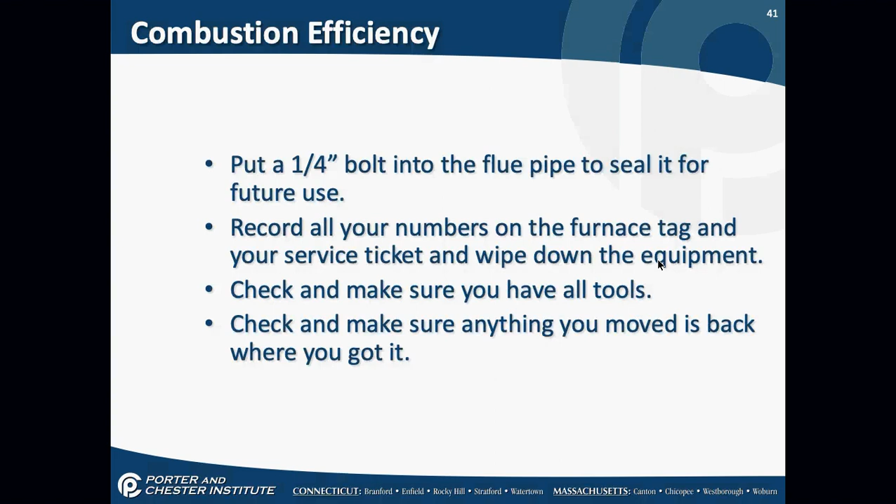Anything you moved while you were cleaning the furnace, like a laundry rack or a table, or anything else you moved, you have to put it back where you got it. Don't leave the homeowner with anything to do.

Find the customer if they're not with you and ask them to inspect your work. Show and explain the combustion efficiency tag and ask that they check the absorbent pad you left under the filter for leaks. Let them know to call you if any leaks are suspected. If not, they can throw the pad away in a few weeks. I guarantee they won't remember.

Ask the customer to take you back to each thermostat and turn each one back to the customer's preferred setting. You don't want to leave the customer anything else to do.

Have I gone back to my truck yet here? No, not yet. Okay, next step: take your tools with you to the truck to complete the paperwork. Anyone know why I stress this? Take the tools with you to your truck and complete your paperwork.

You don't want to embarrass yourself by knocking on the door and asking for your tools. Well, you're going to go back anyway, because you haven't given the customer the paperwork yet. But why do I want my tools with me when I go back out to the truck?

Just making sure you're not leaving anything behind. Well, there's a major reason here, okay? At this point, the customer knows you are done with your preventative maintenance. So once you leave, you are trusting them to let you back into the house to, A, give them their paperwork, which nine out of ten times will include a bill, and B, that you can get your tools.

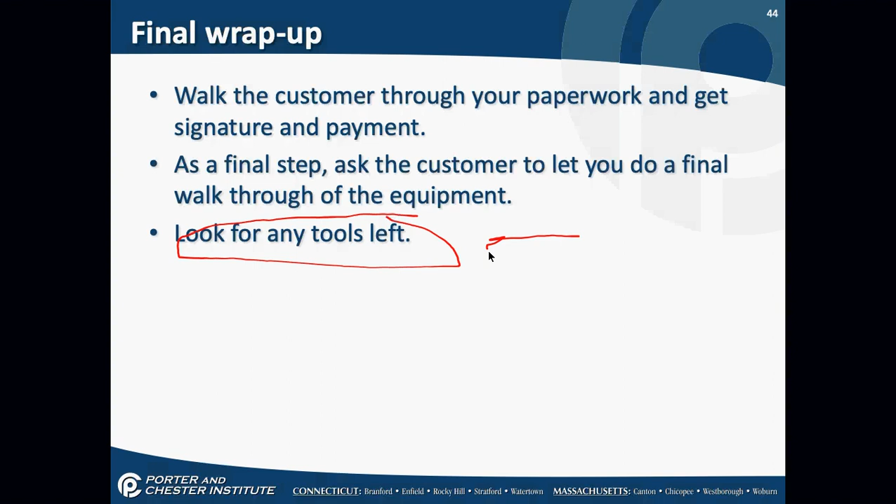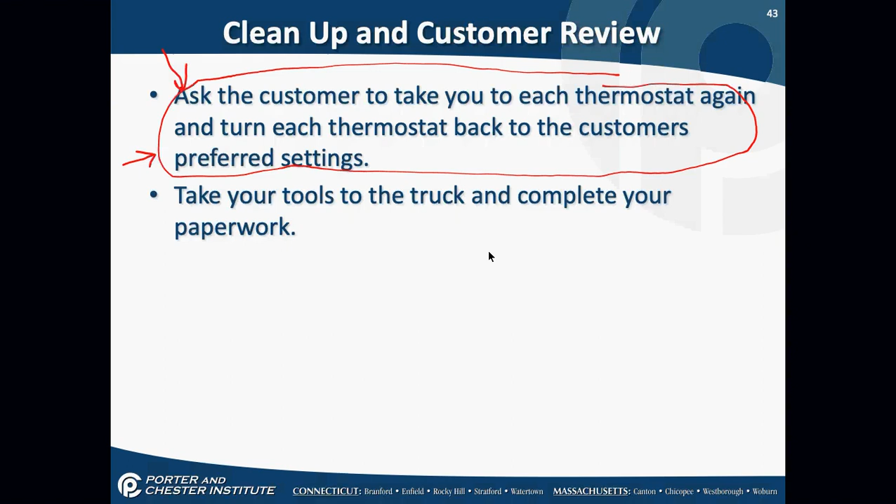Because no matter everything you do, every bit of customer goodwill that you've set up will vanish if you get the no-heat call later because that jumper's still on the system. And do I feel bad if the customer didn't let me back into the house to get my tools and that jumper's on the system? At that point, no. At that point, that's karma.

Make sure all jumpers are removed, valves are open, and switches are on. If you messed with any zone valves, we'll talk more about that when we discuss boilers, but you need to check them. Did the burner shut off when the temperature was turned back down? Again, check and make sure the system's satisfied.

Thank the customer for the time, tell them you'll see them next year, and ask for referrals to neighbors. Ask for permission to have the office call them in a month for a follow-up. The office is going to call anyway, but it's always nice to ask permission. Hey, can we give you a call in a month or so to make sure it's working properly? That's standard procedure, most offices will call anyways.

But that's a preventative maintenance. How long do you think that process should take?

30 minutes to 40. Anybody else? I know somebody here has worked with oil burner techs, I forget who it is. How long did you follow an oil burner tech around, how long did they spend doing an annual tune-up on any oil furnace? I don't know, it was about an hour, more than an hour. Yeah, it's a little bit more than an hour. Probably an hour, I'd say an hour and a half maybe.

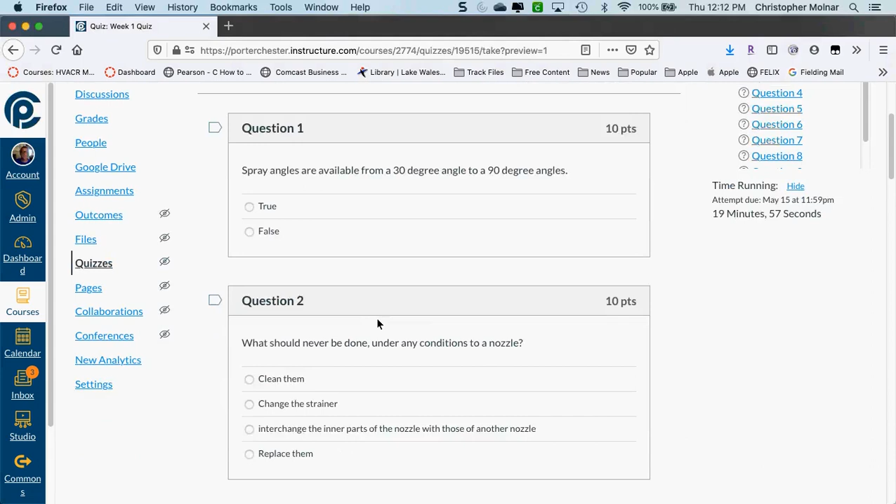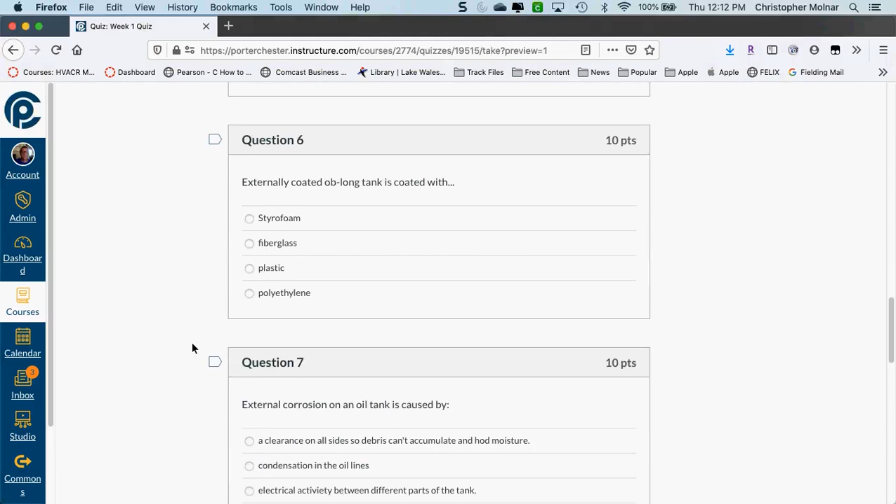Sure, you opened up the quiz. I'm not sure if you talked about that. For the week 1 quiz? Yeah. You've had all the information on this, okay? Just answer the questions because I think we've talked about it. I went through it last night. Spray angles we've talked about. What should never be done, we've talked about that. Type of tank, we've talked about that. It's in your readings. Where do the tanks fail from? We talked about that. I think it's 10 questions, and I actually think we've talked about everything in here.

So okay, you can go ahead, yeah, we've talked about this, and it's gauged metal. That was definitely in your readings, and I think you had another question on it as well from your lab. So yeah, you guys could take that. That's why I opened it, because we've talked about everything there at this point. All right, sounds good. It does have a time limit on it, so when you open it, please try to do it in one sitting, because the time will expire even if you close it and walk away from it.